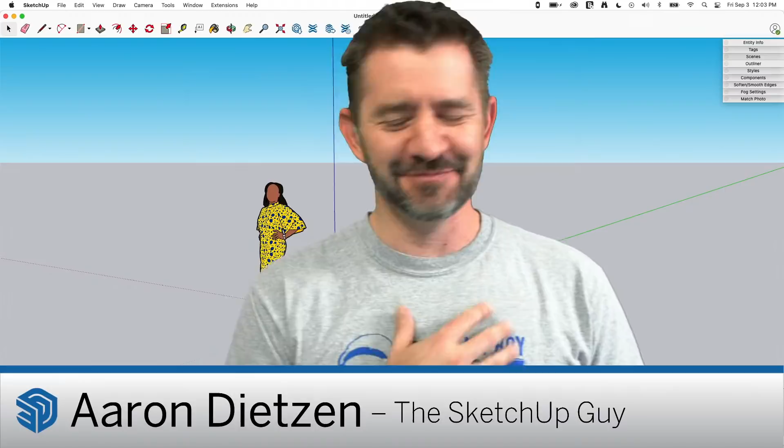Awesome, thank you Matt, well done as always. I was kind of surprised, I thought we were going to hear some trees fall, that's where I thought that was going, but I was fully prepared to hear a tree fall. Wait, you couldn't hear the tree fall? Is that what that was? It sounded like somebody stepping on a frog. Maybe it was a tree that fell in the forest but nobody was there, which answers the age-old question.

A little tree. Hey guys, I am Aaron Dietzen, I am the SketchUp guy, the guy who's going to be doing some modeling today. I have some friends with me, of course. Hanging out with me in our ears doing our intros is our remote sound guy dialing in from Michigan. So let's hear it for Wyoming, Michigan. It's a place. Yay, Wyoming!

And in the booth with me, in our studio, back from sabbatical - you guys missed him and you told us, so we brought him back - Jody, who is playing the role of producer today. I might be going to Wyoming too. So yeah, we're your SketchUp live team, and we're going to do some stuff today.

So this is actually directly from you guys, this was directly requested. You guys wanted to see a cabin get modeled, and we kind of kicked that around. We thought a log cabin specifically, as opposed to a traditionally framed one, that's not much different from like the sheds we've done before. So we thought a log cabin would be something new, something kind of fun, and I don't know, we'll see where it goes. But that's it, we're gonna jump in and start doing this.

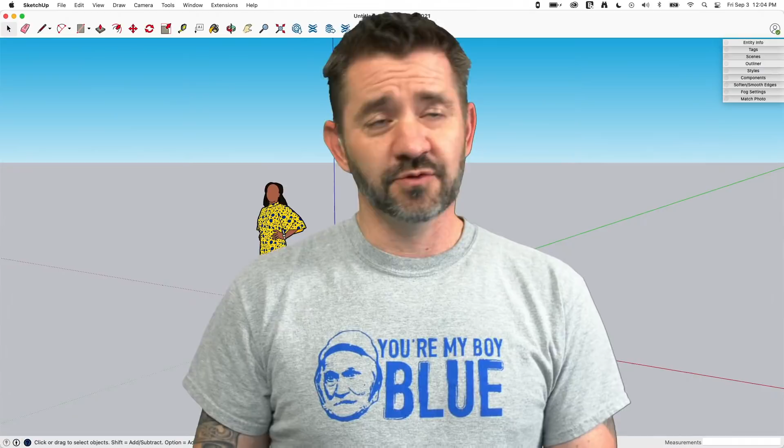Just so you guys know, I know how a log cabin goes together, more or less. I'm not gonna call myself a professional log cabin builder. I also don't want to brag, but I have taken part in a log cabin build once when I was like 12, so I got experience. I did one when I was about 14, which I guess was close to when you were 12. Maybe at the same time, give or take, a year apart or so. So, gonna be flexing those cabin building muscles that I developed in my youth. So let's hop in.

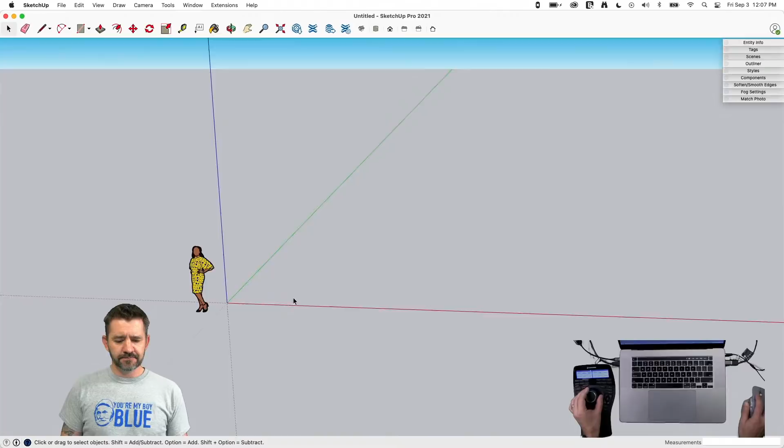I want to build a rectangular structure, so it'll be like, I don't know, 25 feet by 40 feet, something like that. And we'll have two logs, a short side log and a long side log, and then we'll just start by copying those over and over again. So this will be pretty simple to begin with.

I'm going to start, we'll just create one of the logs. So I'm going to create the 40-foot log real quick. I'm going to start with a circle, and I'm just going to stick with the standard 24 side. I don't really think I need to go higher or lower than that. That seems about right.

How big is a log that you build a house with? I'm trying to think - I would say somewhere between 6 and 8 inches. Really, that small? Well, I guess it depends on the log cabin. The one that I built 30 years ago was a pre-built kit, and they were all probably 6 or 8 inches on the side. The cool ones, the bespoke ones, have big foot diameter kind of things.

All right, let's get bespoke with this thing. I'm gonna go 12 inches. Actually, I'm gonna go 6 inches because it's the radius and not the diameter. There we go, so we have a 6-inch log. I'm gonna take this, I want to make it 40 feet, and I want it to extend out a foot on either side, so I'm gonna make this 42 foot. Nice, wow, telephone pole, that's a big piece of wood.

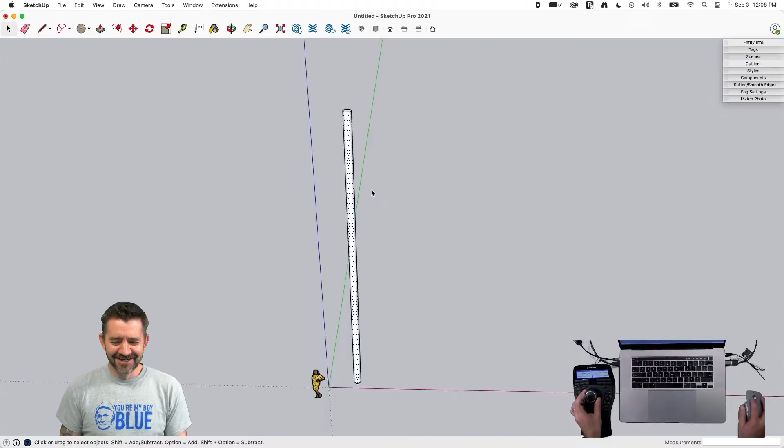All right, I'm gonna make that a component. Big old log, number one, we'll call it a 40-foot log, even though it's 42 foot. Maybe 40 is too big, am I just living the fancy guy life with that? Is that too much? We're gonna lay it on its side.

All I know is that we used multiples to create walls, so it was a bunch of 6, 8, 10, well probably 10, 12-foot ones. I don't think I've ever seen a 40-foot log. I don't think so either. So I'm gonna shorten this up by 10 feet. That looks a little more realistic. All right, I think that'll work, I don't know.

We'll see, we're winging this whole thing, right? So I'm going to take that and go from the center line, make a copy over this way, 25 feet. Boom, gosh, that seems huge too. All right, so we're going to say 20 feet, we'll bring it back, 20 by 30. That's the size of our cabin.

I'm going to take one of these right here, I'm going to rotate it on the flat. I'm going to option rotate 90 degrees. Obviously it's not lined up right now, I'm going to scoot it over.

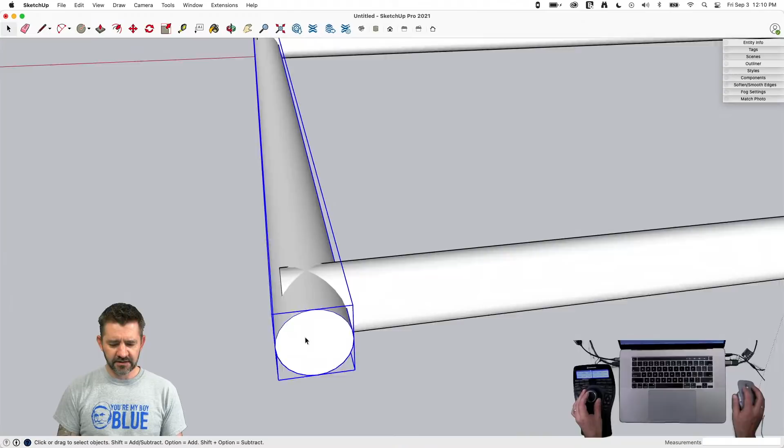So I'm going to take this end right here. I'm going to slide it over to the middle, and then I'm going to slide it over 12 inches. That gives me a 1 foot overlap this way. Same thing here. I'm going to grab it by the edge, pull it in to here, and then move it this way 12 inches. That gives us more than the center. Sorry. I'll put the center right here at the edge and then slide that over 12 inches. So that gives us, this is the overlap we want to maintain throughout this whole thing.

Now, so what did you say the diameter was on these? 1 foot. Oh, okay. Yeah, it occurs to me that also, since this is just fun, if you have a 6-inch log, it's going to take a lot more rows of logs to make your cabin. That's true. Literally twice as many. One would say. All right.

This is not going to work because I have the same component on all three sides. That's not obviously going to work. So I'm going to make this into a new component. I'm going to say make unique. After I make unique, I'm going to pull up entity info and change it from a 40-foot log, which is actually a 30-foot log, down to a 20-foot log. That's going to be confusing. I should probably rename all of these.

Speaking of confusing, having all these monitors, gigantic monitors and tabs and screens, I'm a little overwhelmed right now. Yeah, this is studio life. This is real deal. I don't know how I feel about it.

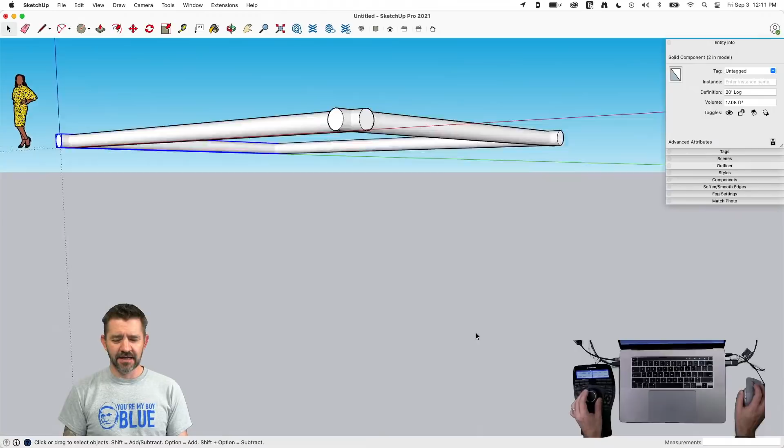I'm going to shorten this one up by 10 feet. And then I'm going to grab it and option copy it this way, 30 feet. All right, so that's the footprint of the house. I know the logs are crossing through each other. I haven't missed that. I do realize that's happening. But that's okay, because right now I just wanted to get the general layout.

This looks good. What I want to do is I want to go in and notch my logs so they sit inside of each other. So one's going to, at the ends we'll have a notch. So when this all goes up, each one will rest firmly upon the one below.

So what that means, these two, my two end logs, are going to go up, move them vertically, constrained to the vertical axis to the center of this log here. And then I could actually, at this point, grab that, option, copy that up, and we could do that like 8 times, which gives us like a 9-foot tall log cabin. So we're almost done at this point. Nice. Done. Good job. We really nailed it today.

Andy still said he can barely hear me, even though I'm all up on this mic. Oh, see that? When you just said all up on this mic, you got up there. Your audio shot up. I got louder? Okay, so yeah. I literally just need to, my lips keep grazing the edge of this thing. That's the one. We'll wipe it down afterwards. Don't worry about it. Did you wipe it down before? You're pretty good friends with Tyson, right? He's the last one who was on there. Wow.

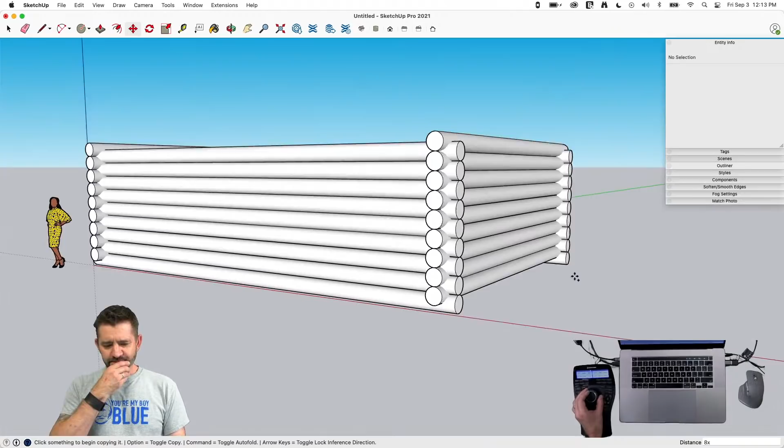Cool. All right. So obviously we're not really almost done. What we need to do is we need to come in and notch some stuff. I do want to keep some of these unnotched because I might want to use them on the top or something like that. So I'm going to option copy these over here and I'm going to hit make unique. So that just gives me this set of, and this is just something I recommend to anybody who's using components. As you go and use components, anytime I change one of these, they're all going to change. That's the nature of components. That's how it's supposed to go.

But you don't always want that. So I find in my working models, when I'm working with components, you guys have seen this on some of my models, I'll have previous copies of components just kind of sitting over on the side, just to hold on to in case I ever need to go back to this shape. This is a pretty simple shape. I could probably... And that's just like building a real log cabin. I usually have an entire floor or entire row of logs sitting off to the side. I just pick them all up and carry them over.

Usually, because Jody's just knocking out log cabins. No big deal. Yeah, I mean, it's a thing.

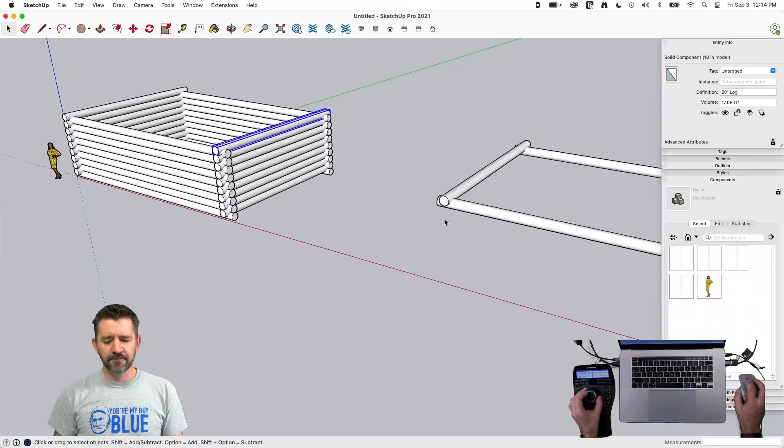Okay, and so as far as a workflow thing, those components would be saved in your components browser or whatever, right? So you don't need to have a copy of them off to the side, but it's more just for your peace of mind, or that's what you're used to doing kind of thing. Absolutely, 100%. Yeah, Matt's right. So right now I have these components, my 30 and my 20-foot log, and then I have 20-foot log number 1 and 30-foot log number 1. These are the copies. So if you look over here, I have these sitting here.

So if I was to delete these, or in fact delete all this, I could bring it all back with my component browser. Or Control Z. Or yeah, I can undo and get it back too. Excellent point. My issue with this is if you look at my thumbnails, they all look like pieces of chalk. So to come in here and find the one I need, I guess I could change my list to list view and I could find out what I need.

But yeah, for me, it's easier to have this. Like you guys saw when I posted about the big Lego build I did, I actually had physical ones sitting off to the side so I could grab them real quick and copy them over rather than having to dive into the browser and find those. Especially when there's only a couple of them like this, it's pretty easy to set it aside. They're there in case I need it.

So Lawrence had a good pro tip: whenever he moves stuff off to the side, he moves it a fixed distance. That way he can move it back. That is an awesome tip, actually. If I know it's going to come back in, I will move it in increments of 10 feet usually. So 10 feet, 100 feet, 150 feet, 500 feet on one axis. That way you can bring it just right in.

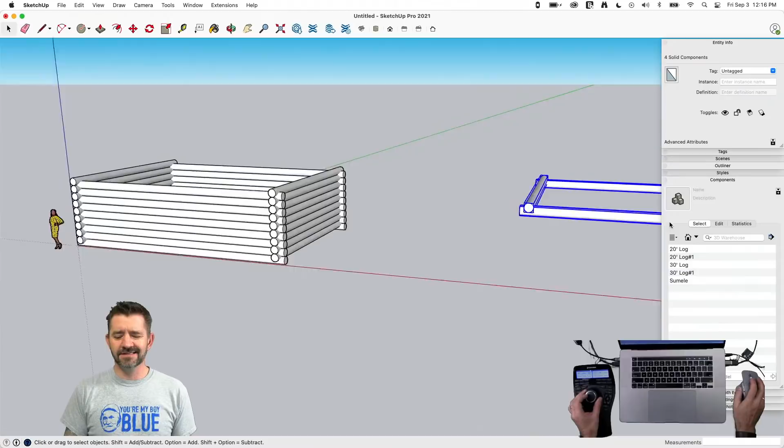The other thing I could have done too is I could have just made a copy of them in place and put them on a tag that I turn off. That would work too. But like I said, I'm very visual with my modeling, so seeing this over here kind of helps me. All right, let's talk about this.

So what I want to do, I'm going to hide the rest of my model. I'm also going to go into View, Component Edit, and hide similar components. So I just want this one thing. If I look at that, I don't like that the axis is all the way over there. It always kills me when my axis ends up off axis. Can I reset it? If I just say reset, it's just going to go back to... No.

Nice. Sounds like somebody just buzzed us. Oh, could you hear that? Yeah. Oh, wow. Yeah, that was just background noise. Keeping it real. Even though you guys are in the studio, I am. That's right. Matt's not living the studio life, unfortunately. And apparently Matt's mic doesn't have to be in his face to pick up sounds. Yeah. I bet if I went out and fired up a weed eater, you'd probably hear it.

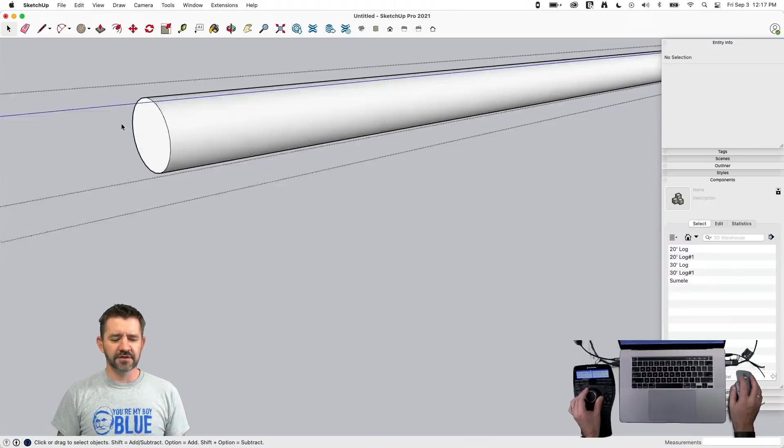Probably so. All right, so what I want to do is notch the bottom of my logs. So each log, if I look at this, I want to see a notch right here and a notch right here that will fit over the round top. Like I said, full on Lincoln log style. Except I only want to do it on the bottom, so I don't need it on the top. I know in real life I'd probably plane out the top so there's a snugger connection and I have less to insulate, but we're going to pretend these are perfectly round, ideal, beautiful logs.

Yeah, the kit I built had smaller logs than this, and the tops and bottoms were flat. On the bottom it had two channels running along the whole length of it, and then it had two reverse grooves running along the top, and they just all slotted together. Grooves works. But when I've seen this style, there's also usually a spline between the two. They'll run the length of it with just a groove cut out.

And they stick a, like a half-inch spline or something that keeps it all from rolling off. Because rolling, that's a problem with round logs. We're going old school. We're going like Jebediah Springfield right here. Okay, all right.

So what I'm going to do, I'm going to come in and grab this geometry and Control C to copy it. I'm going to come in here and I'm going to do an edit, paste in place. As soon as that geometry comes in, I'm going to right click and group it. I'm going to grab this geometry right here, group it, and I'm going to take this group, option, move it over

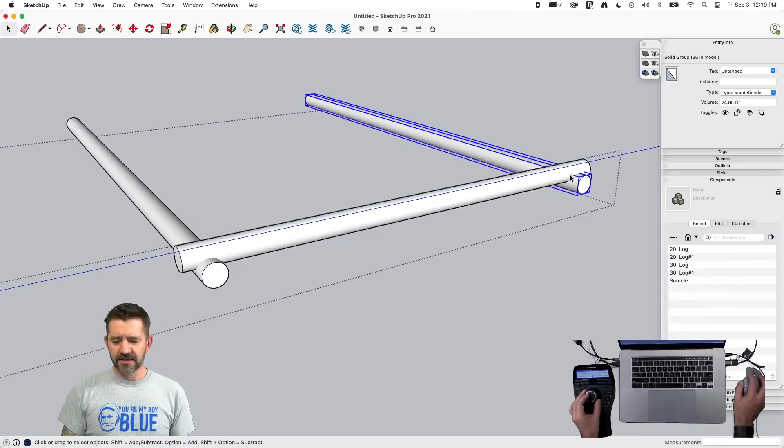20 feet. All right, so now I have these two sacrificial groups that are going to help me cut my channel into this piece. I'm going to use solid tools for this. So I'm going to go tool palettes, open up solid tools, and I'm going to say, okay, select this one and subtract it from this one. And then select this one, subtract it. That was exciting. From this one. I don't know what just happened, but something happened.

A thing happened. All right, so if I look at it from this angle right now, I can see those lines where the small logs run over the top of the bottom logs. This side, not so good, right? Because I still don't have a line right here. I can do the same thing. So I can go grab this guy, grab this geometry, copy it, come into, oops, hold on.

Actually, one thing I do want to do, I can explode this geometry now. You guys have used 3D Warehouse. You've probably seen this where you download a model and it's just containers around raw geometry, just groups inside of components, inside of groups. I try not to do that. I try to keep the minimal number of wrappers around my geometry I need. This log by itself is one thing. I don't think I need 2 or 3 different wrappers around it. So that's why I did go in, make sure I explode it back out. I just need that geometry.

All right. Extra packaging here, keeps it super fresh. That's right. Geometry will never spoil. Oh man, my modeling's good enough. It's super fresh. I don't need help with that. Super fresh. That's what your shirt should say.

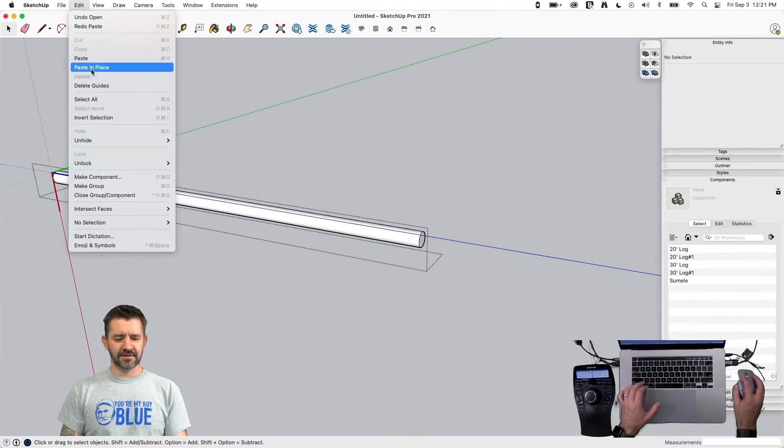I like that. All right, so I'm gonna grab this in, same thing, make a group. Huh. Okay. This over this way 30 feet. I'm not sure why I got that angled container. Let's see what happens when I do this one. Grab this guy right here, make a group, as expected. All right. Huh. That's neat. All right, so I'm gonna use this, subtract from here, use this, subtract from here. All right, so now I got my grooved logs.

Nice. Groovy. Okay, so here's a pair of questions. When was the last time you worked with Lincoln Logs? And since we have an audience that is not all just here in the US, I wonder if Lincoln Logs exist as Lincoln Logs or another name elsewhere. That's a good question. I think I built something on Lincoln Logs in the last year. I don't know where I came across it. Must have found my kid's old set or something.

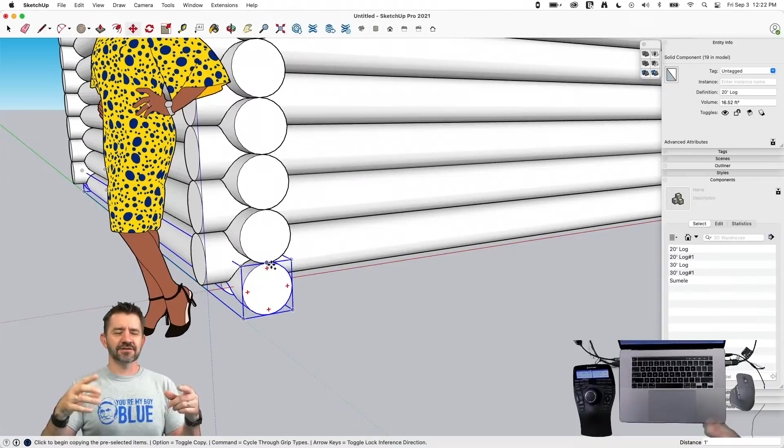I feel like that's a thing that our family has going on at Christmas. For some reason, there's a set of Lincoln Logs we have with our Christmas decorations, and they just tend to come up around Christmas time each time in our house. Did you ever get them in that big metal tin? Yeah, that's how ours currently exist. Yeah, and that tin's getting emptier and emptier every time I see it too. I think it's like an outhouse building kit at this point. There's like 2 super long ones and then a bunch of little things. So as Lawrence pointed out earlier, referencing logs is just bathroom humor waiting to happen.

Oh, nailed it. I'm gonna grab this guy right here and make it unique. I'm gonna set this one on the ground. So I'm gonna come in here and I am going to put geometry on it that's gonna cut it in half. So I could try to do something with solid tools or something like that. But as I look at it, again, I like to do the quickest, easiest commands to get the job done. Doing that and cutting it, and then just selecting and deleting that bottom half seemed like the quickest way to clean that up.

So I know I got a little bit of scrap here to go back and clean up, but it's little log spider legs or something.

So I know spiders have 8 legs. But how many do spider logs have? Yeah. That's a good question. Speaking of Loggy long legs, speaking of spiders, did you watch the new Spider-Man trailer yet? When it came out, a week ago? Yeah. Sorry, didn't mean to sound snotty. When you've been gone for almost 3 weeks, then everything happened. That's just true. It's all I've got to catch up on, 3 weeks' worth. Yes, I did watch that. Yes, and it was good.

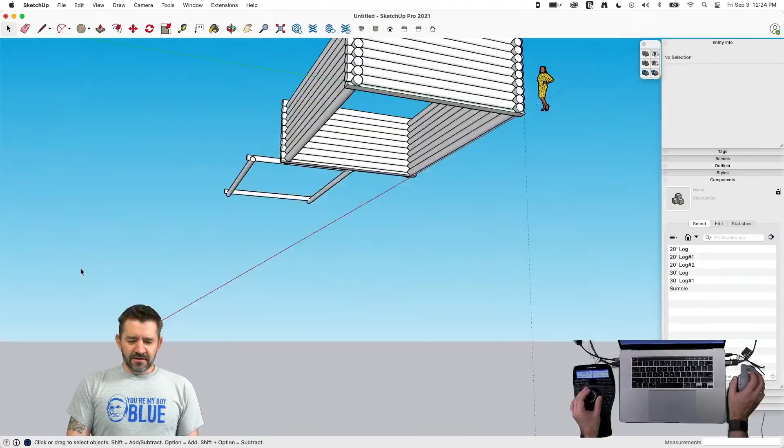Okay. Hey, you know what I should probably do at this point? Save. Oh, that lazy save. The lazy saver? For some reason, that now always makes me think of, and it's unfair because it's really a Matt sound, but it makes me think of Nick. A lightning save. His attempt to reproduce it was up there. Huh. Oh, I guess I might have some.

Hold up 1 second. Where's it at? General. Oh, there we go. I do not need to autosave, and I do not. Oh, that's okay. I don't care if you do that. Just don't mess with it. Okay. Had some autosave stuff turned on that I personally don't care for.

You don't like to save. I don't. I mean, I think I've pretty well proven that saving's just not my deal. It's not in your wheelhouse. It's not a thing I do. Okay. Cool.

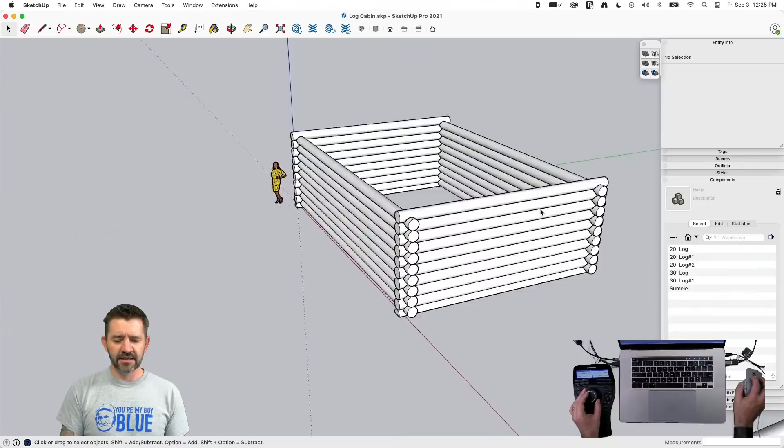It's looking good. It's definitely got a cabin-y feel. So there's a couple things we're going to do at this point. We're going to come in and put some doors and windows in. I'm picturing a door right here in the middle, maybe a window, and then maybe we'll do a window in the middle of each side here. Keep this back wall solid like that. Something like that'll happen. I want to put a roof on it, of course.

My roof, as I take it up, I want my logs to continue up the peak. And then I'll have basically a ridge beam. It'll be a log. And then halfway down on either side, we'll put another log perpendicular. So on the end here, as it goes up, we'll have a log at the peak, a log coming down here like that, running horizontally across, if that all makes sense. Well, I want to do it even if it doesn't make sense. That's what I'm going to do.

Maybe before you get started, you can talk about that thing there in your left hand. A question came up about this? What, this whole thing? Yep. So this right here is my 3D mouse. It is a SpaceMouse Enterprise from the company 3Dconnexion. A 3D mouse allows you to move your model in 3D space without using this piece right here. So I can hold this in my hand like this and still spin around right here.

This is good for two reasons. One, as a designer, it's the thing that can allow you to go to that next level. Because as I'm moving this hand over here, moving in 3D space, this hand is free to move the mouse and edit the UI, grab the next command, whatever I want. I can do that here while this mouse is going and grabbing whatever I need.

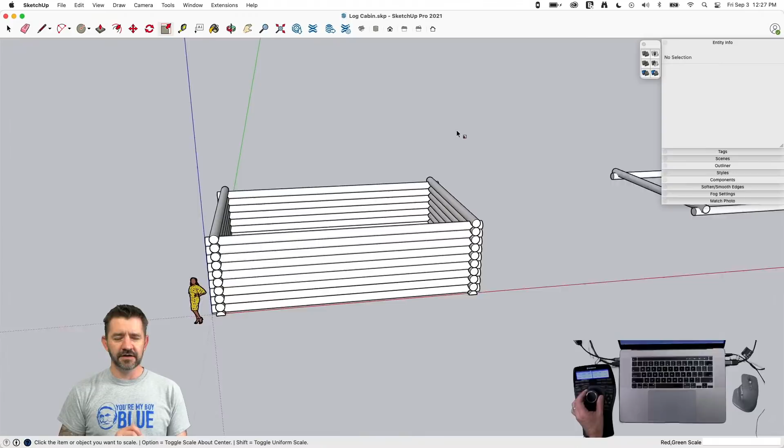The other thing it does is it makes for very nice presentations, because I can move in much smoother increments with a 3D mouse than I can using the roll and then drag and orbit here. SketchUp users are used to this, right? We all know how this works. We spin, spin, spin, zoom, zoom, zoom out, spin, spin. It's actually very intuitive and easy to learn, and I recommend new people figure out how to use that because it makes moving in 3D very simple.

The downside to it is if your brain's not prepared for that, it can be a little disorienting. Same with this. Some people, believe it or not, don't enjoy watching this jerky movement. So if you do a lot of presentations, you show models to customers, something like that, something that can take it to the next level is moving around with a 3D mouse like this.

Nice, smooth movements. Buttery smooth seems to be the phrase that pays. It's what comes up every time.

So that's how it is, it's not a requirement to run SketchUp by any means. You don't have to have it. But I usually recommend it to people who are either doing a lot of presentations or they're designers looking how to go from where they're at to the next step. It's also worth saying, tech geeks that just like to have new, cool, whiz-bang things - it is an awesome toy.

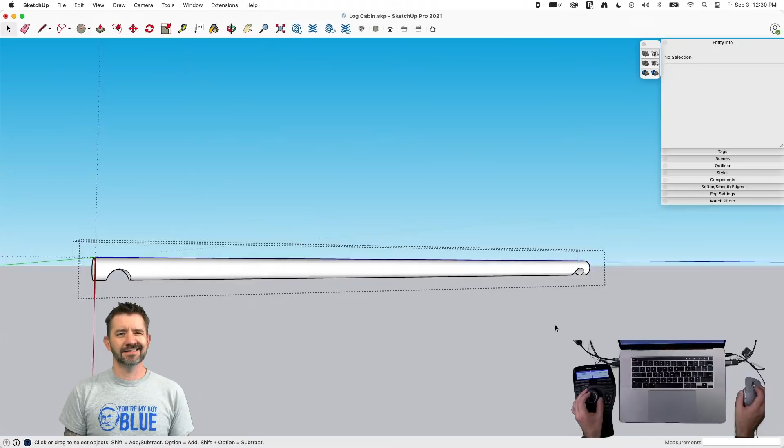Bill's also wondering if it's easier to stand or sit while you're modeling. I've done a lot of both. Standing's kind of nice - I think I tend to be a fairly animated presenter. If I'm talking about something or brainstorming, I like to walk around the room and that kind of thing, so standing up works a little bit better for me. But there's also times where I've done longer design sessions or modeling large models, a hotel, something like that, where it gets tiring and sitting down is kind of nice. So I'll go either way.

He said thanks, so that must have been what you wanted. Although Irfan did wonder how you isolated that object from the others.

Each of these are components right now, so if I double click into one of these, everything else goes away because I have some things turned on. If I go up here to View and then Component Edit, you can see Hide Rest of Model is turned on and then Hide Similar Components. If I turn them off one at a time - Hide Similar Components says hide everything else that is this same component. And the other option, View, Component, Hide Rest of Model, is going to show everything, hide everything else. Generally speaking, I do have a shortcut key for Hide Rest of Model, so I'll toggle that on and off with a shortcut key on my mouse. But I don't usually hide components unless I have something like this, where it's the same thing over and over again.

Yeah, but that's a good tool to know how to use because it makes it a lot easier to go in and model those entities for sure. Nice, thanks.

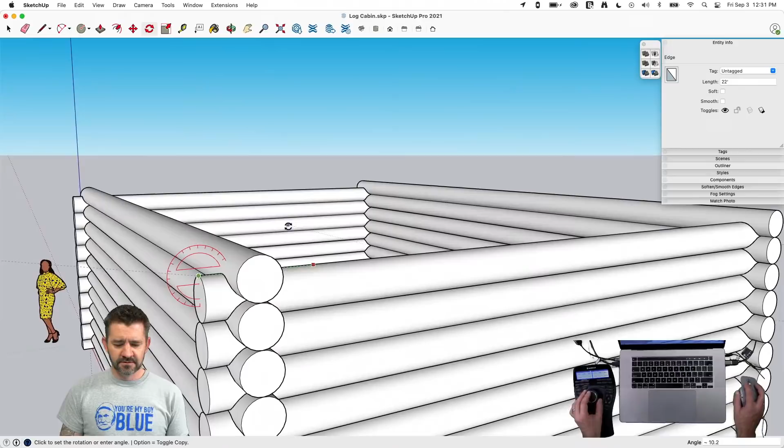All right, I'm going to draw some geometry here. This is something where I could probably use guides, but I'm not going to - because they didn't have guides in old-timey days, that's when they made right, log cabins. And I don't have a specific...

I wonder, if I was to... I feel like since we already renamed layers to tags, I think we should rename guides to Sherpas or something, a little more adventure-y.

I'm just going to rotate this roof so that it... whoops, I forgot to hit Option. I'm just rotating it here so that it comes up and touches the side of the log right there. Didn't hit the Option again. Wow, third try's the charm, folks. Let's try it again - so I'm here, get constrained, hit my modifier key to copy, not move. There we go. All right, so that is the roof I want to put on here.

Not 100% sure I'm going to do this, but I'm going to grab this piece, Option, put it up here. Let's see, we'll do it five times, seven times to cover that geometry.

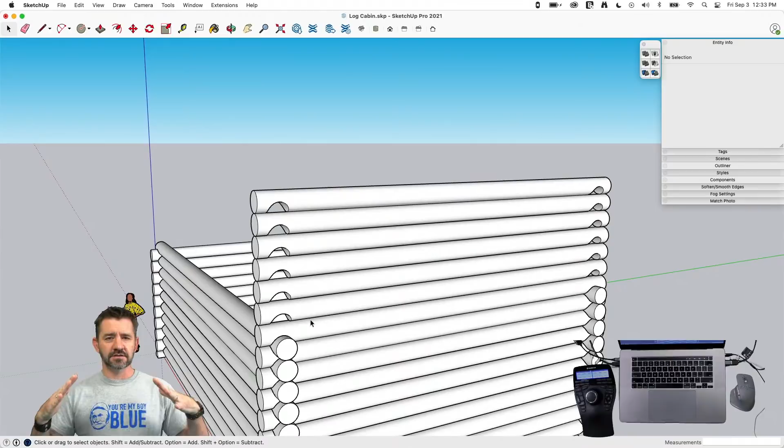Now, here's the thing that's going to happen. I'm going to create some geometry to start chopping chunks out of these logs because I want the logs to follow where the roof sheathing will go. So I want to come up to the flat like that. The problem is that each of these will have to be a separate component.

The only reason - and this isn't a problem, this is something I have to address right now - if I grab all of these right now and say make unique, what it does is it takes all 7 copies and makes all of them the same new component. So you see they are all log number 3.

So in order to do this, I have to say grab this one, make unique, grab this one, make unique, and work my way up there. I believe there's an extension called Make All Unique - does that sound right, you guys? Do you remember, is that familiar? I never used it. That will let you grab them all, and then everything you grab becomes its own new thing. But I don't remember what that is, and I don't know that I have it installed.

So having done that now, I can look at this, and I can see this is 20-foot log 3, 4, 5, 6, 7, 8, and 9. Cool. So I'm going to grab these.

So do I need to keep them as components is probably a question that I could ask right now. I don't know. Nice, good definitive answer. I love that, I definitely don't know. Okay, better, that was definitive. The reason I say I don't know is because it really depends what you're doing with this model, is what it all comes down to.

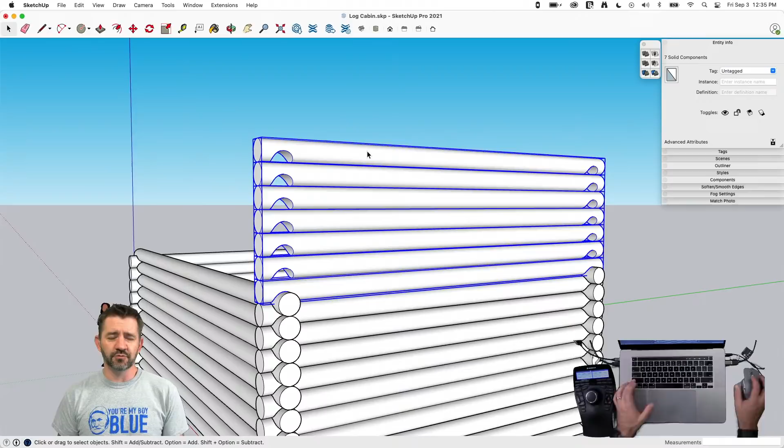If I'm using components to make a materials list, then they'll have to end up as components. If I'm just modeling this as one piece, I could probably grab all these and put them into a single geometry and have a single solid out of all of them. It really depends on what you're using it for.

I'm going to try to keep my pieces separate. Not that I'm going to break this apart and go build a log cabin out of it, but it may be a reason to keep it as components, is what Keggy's mentioning right now. Whatever I do here is also going to have to come over to this side, so making components probably isn't a bad idea, since I may go edit it afterwards, and then both sides will get edited the same. So that could be a reason to keep it that way.

All right, I'm going to take these right now and slide them this way 2 feet, because I need to get back to this geometry right here. I'm going to triple click and make this a group, then go into that group. What I need to do now is make a cutter.

So I'm just going to draw some vertical lines, like that. Pretty much exactly how we did it years ago when I built my log cabin. Yep, just a big chunk of throwaway geometry - that's what we're looking at.

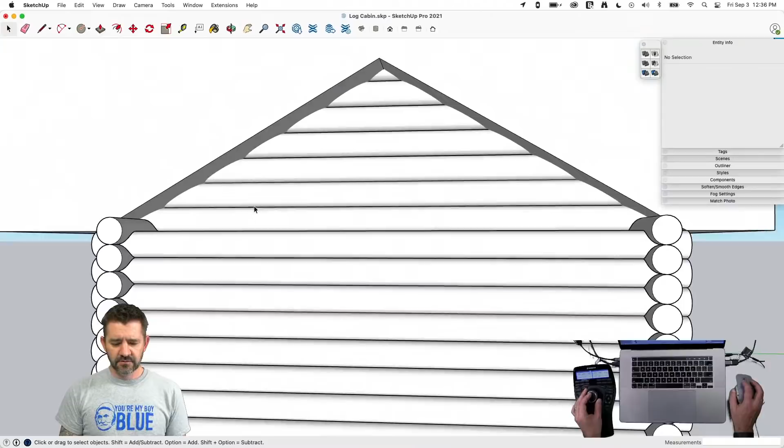All right, so that is just a big solid cutter. I don't like when geometry laps out up to the edge of my cutter, so I'll make it bigger. All right, so there we go - that is the kind of geometry I want to cut out of this.

So what I can do now is select this piece. I'm going to throw out this one because I'll actually have my ridge beam there anyhow, so I'm just going to toss that one out. Select this one, and rather than saying subtract - this is a big difference - if I say subtract and subtract this from this one... wait, what? Subtract.

What did I hit? Oh, I didn't hit the right one. They're so little and so similar, and I can't see good anymore. So I say subtract that from this - I will get this log, but look, my cutter's gone.

So what I'm going to do instead is select it and use the one below it. No, it's not below it, it's this one over here. Wait for the tooltip if you can't see those buttons.

And I'm going to use trim to trim this, then this, then this, then this, then this, and then finally that. So this one's having a problem - there's an issue, I think it's because my geometry laps through, I think it runs up against the edge. So what I might do here, I'm going to option push-pull this all the way through like that.

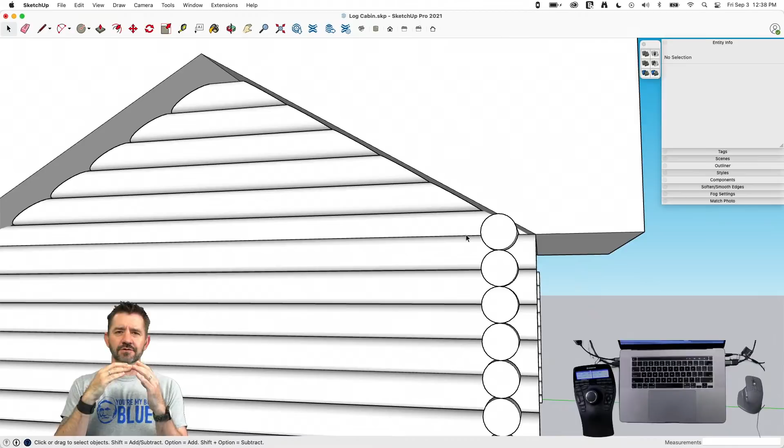When you do solid tools and have geometry that comes to a point, solid tools and points aren't great because they're confusing spots. Just like if I tried to make these two into a single component, solid would have an issue because it has geometry that joins at a single line. By the general rule of creating a manifold piece, a solid piece, one line always connects to only two surfaces. If you think about a cube, all 12 lines, each one only connects one surface on each side.

When you have geometry like this, where the pieces connect and come together with a line here, that center line is then connected to 4 faces. So it violates the rules of what a solid is.

That's exactly what I was creating with that intersect. Right here it's hard to see that line, but where it's connecting I was having geometry on this side and geometry on this side, so it wasn't making a solid, which is why I threw it out. By extending it long like that, I should be able to select here and then trim this, and then I should have that. So that's good, though obviously not perfect.

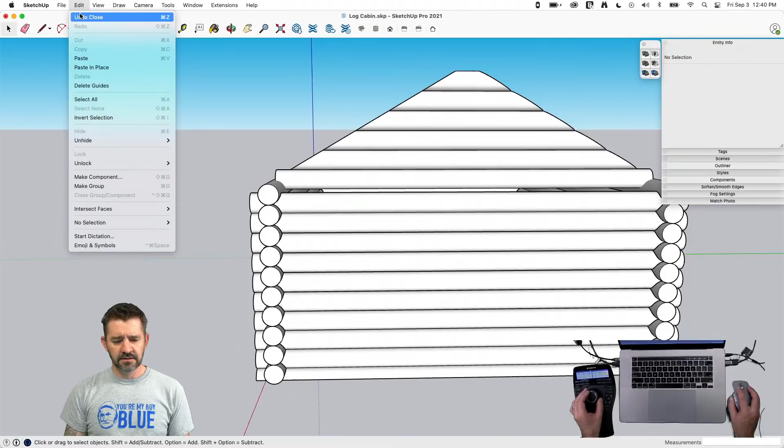So what I'm going to do is temporarily hide this. I come into this, turn everything back on. I'm going to push this end to the middle here, and then double click here. That lets me come back out, edit, unhide, last. And now I can do one last subtraction here because I can grab this guy and trim this. All right, there we go.

All right, so now I will grab all of these and move that back 24 inches. And this does sit on here, so I'll probably want to honor that notch.

So I'll do the same thing I did before. Grab this geometry, Command C, come in here, hide everything else, edit, paste in place, make a group, move it over 20 feet, make a group, and then same thing. So now we can just subtract that from here and subtract that from here.

Nice, it's a lot easier to make these not in real life. They balance a lot easier on top of each other, you know? Perfect circles, just like in nature, how we have those all the time. Yeah, absolutely. Who wouldn't love to have, what is that, probably 120 different logs, all perfectly straight, same diameter.

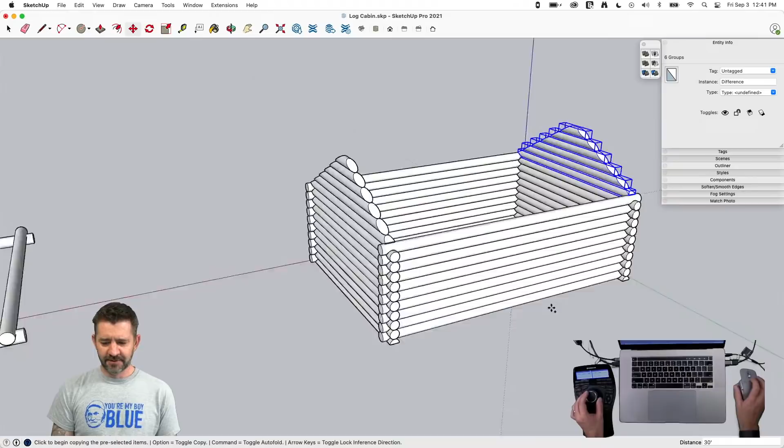I'm going to copy that over 30 feet, and we're going to take a look at putting our ridge beam in.

So for this, I am going to go to the ridge beam we had over here. Let's see, if I grab it by this point right here, and I'm not going to get in the right spot, but I just want to get it aligned to the proper height, I think. And then we'll slide this over this way to any midpoint. All right, I think that works.

I deleted my roof solid, but now that I did that, I'm like, I really could actually kind of use that. So I'm going to make a roof plane right here.

I'm going to attempt to use rotated rectangle. Wow, you gotta be careful. Not that that's a big deal, I just never use it, so every time I come in here to try it, I'm like... So I'm going to grab this point here. Click, click, click. First try! Nice, look at that.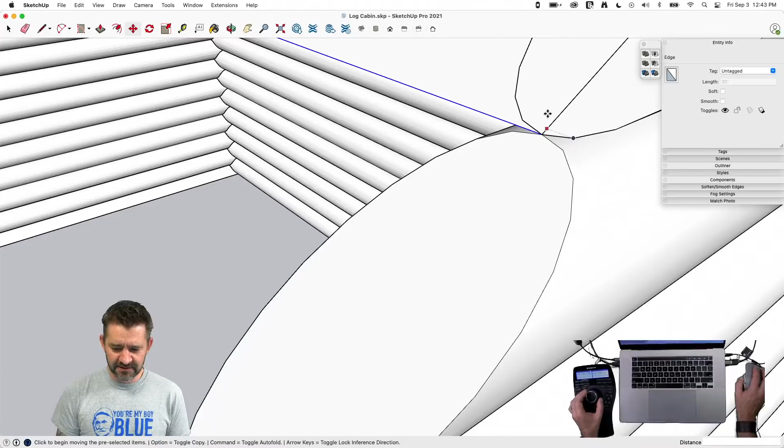And then I'm going to grab this end and move it from this intersection down to the middle of the edge of this log here. Okay, shaping up nicely. Got a little protection from the elements there.

That's nice, it's nice. All right, so I'm going to extend this piece long. What I'm going to do is grab it and move it from this intersection to this intersection, which keeps it in plane by using the snaps on that log.

Cool. Now I need one on the other side, and I'm trying to think of how to best... oh, I know what I can do. I'm going to grab it and make it a group. I'm just making a group so the geometry isn't joining with it. Actually, everything's components, that wouldn't happen. And then I'm going to show my hidden geometry.

I'm going to do a rotate along the center of this log. I'll hit rotate, slide up the middle of this log until I hit that midpoint. There it is. I'll go Option, swing that around 180 degrees, and we have those two making our roof geometry.

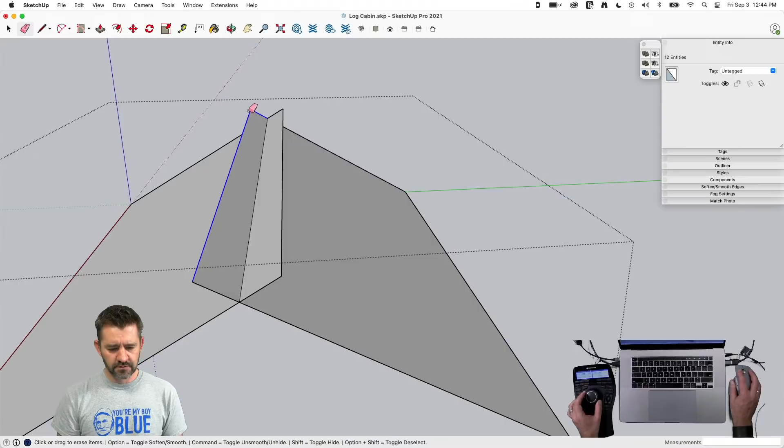So I'm going to make a group out of those two groups, come in here, explode both of them, put a line down the middle. There we go. So that's a roof, folks. Argue with that if you can.

So if the roof's going to sit on top of these cut logs, that's the geometry I need to match. So that's the bottom of the roofing, basically, that's my ceiling. So when I come in here, that's what I want to see.

So this log I have currently needs to get dropped, right? Because it's coming up through the ceiling right now. So I'll go ahead and take it and push it down. I'm just going to start dropping it down to see what happens here.

So you're going to add all of the roof support beneath that height? Yeah, so my actual roofing members would then run up on top of this log.

Do you guys believe that? We'll see, we'll see, sure. It's your cabin, man. That's true. I know what I'm talking about. I know, kind of.

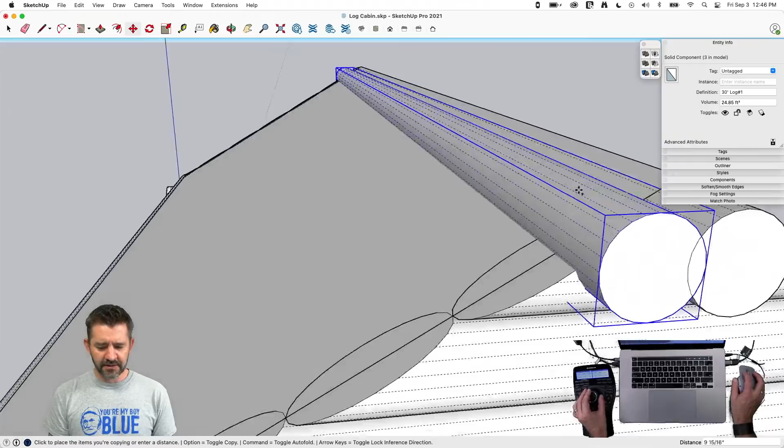All right, I'm going to grab it. This is going to be a little arbitrary, but I'm going to grab it by this point right here. So you see, I did lower it down so that this line and this line, these edges actually hit that roof surface, that's why they're shining through. I'm going to grab it by this point, Option copy it, go down 3 logs, 1, 2, 3, and place this one right here.

All right, I'm going to do that again right here. Option, 1, 2, 3 down.

All right, so the only issue I'm having with that particular placement is that I can't very well notch this like that. We can do anything we want, but I'm going to grab both of these and move it up to the middle of this log right here.

And then I'm going to shift it in again by that same point. It's going to come in to there. That works. So now that puts that in the middle here, so I could do the same notching I did before, without the same issue with that little chunk right there.

So I don't know if that makes a difference actually. Yeah, I don't know how this happens in the real world. I don't know, it's weird. Put a bunch of mud in there. That's right, just fill it all in.

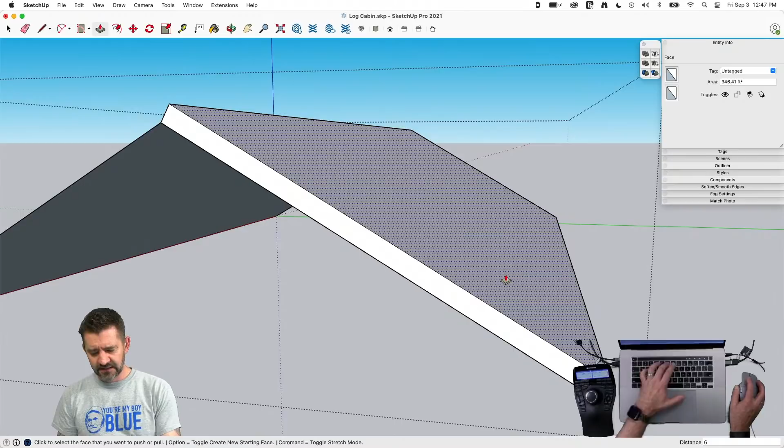There you go. Just for right now, I'm going to take this and make this like 6 inches thick. Double click here.

And then to close up the ridge here, I'm going to grab a line here, continue on up like that. Grab a line here, continue that up. Do a quick push pull down the end.

Just to have something that's more than a plane sitting on top. Here, and we'll actually come over here, we'll pull this down like 18 inches also.

Oh, we probably need to pull these ends out too. Okay. Good. Grab that.

Sorry Matt, do you need class to stop so you can answer your phone? Hello. Go for Abe Matt, Lincoln. Honest Abe.

All right, I want to cut this out. I want to cut a pocket here. So I'm going to grab this, again same thing I did before. Command C to copy that geometry.

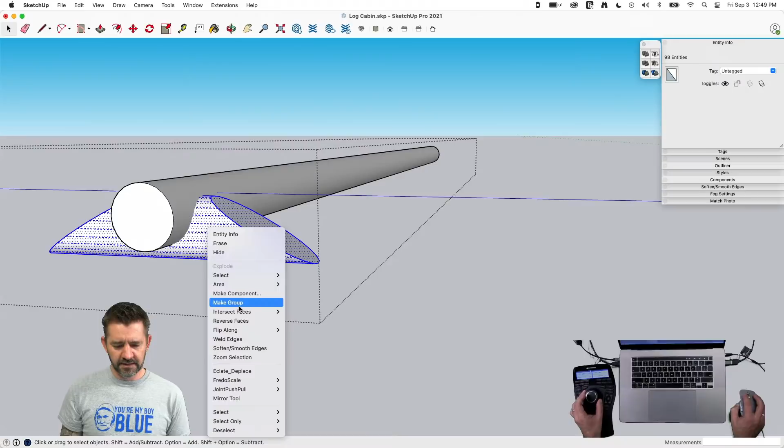Come in here, edit, paste in place, and then make group, make group, and then I will just subtract that out of this.

I'm just going to do the same thing here also. I want to see something, I want to see how far apart these two are. A weird dimension apart. Okay, so I'm not going to do that.

So as I'm watching you do this, in this, what completely looks like a made up fashion. So about a year and a half ago, I came across this YouTube channel called My Self-Reliance. The guy literally bought a big old chunk of land in Canada, sort of like Alaska, and built multiple log cabins from scratch. So even though I haven't built one recently, I have watched somebody do this in the last 2 years.

Are you hinting that I'm not doing this perfectly right now? I think you're doing it perfectly for you. Ah, thanks, I think.

This is exactly how Lincoln intended, how the framers intended. That's right. That's what I heard.

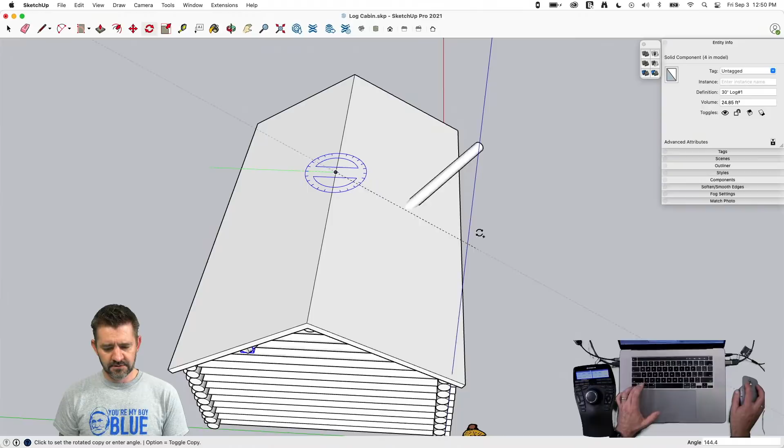All right, that's actually kind of where I want that to go. So I'm gonna take that. I'm gonna go to the top here. Obviously, I feel like I can point this out, but maybe I'm not making a model that would be built necessarily so much as something that's gonna look good.

And yeah, it still was cozy. When we were on the inside for a little bit, I was like, "Ooh, we got a little fire going in here." Yeah. Well, it's all wood, a little potbelly stove, you could burn the whole thing down pretty easily. Well, that's a glass is half full kind of view.

Yeah. I think my issue with this design technique you've got here is that you've got 30-foot logs that you've somehow got to get 12 feet in the air without a crane. Oh, they do it on those Alaskan survival shows all the time. Just need a little elbow grease. So. Not a solid.

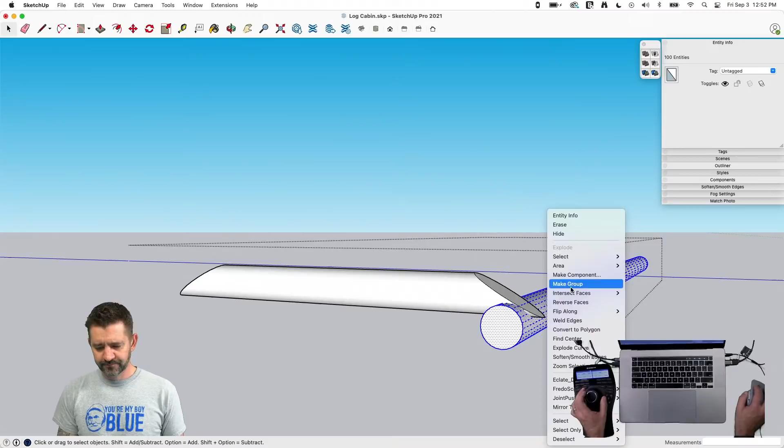Yeah. Huh. Got a stray edge. Save. Save. Okay. There we go. Lazy save. All right, so that works there. And then I'll have to do the same thing. So I'll come in here, edit, paste in place. Ooh, I don't know if that's going to work, but let's find out. Ooh, it did.

Yeah, I'm assuming we'll just, as Matt says, fill that with mud. Get the mud out. I love how mud even sounds. When he has to make sound effects, he's all over it. So don't even worry. Matt's got this.

Nice. Got that. Well, that's not gonna work. Your log's hollow. Oh, neat. That's how I get it up there so high. Yeah, it's gotta be lightweight. It's like cardboard. Fill it in later. I feel like it'd be really flimsy, like a rolled up piece of paper. Yep. It's those big concrete tubes. It's good stuff.

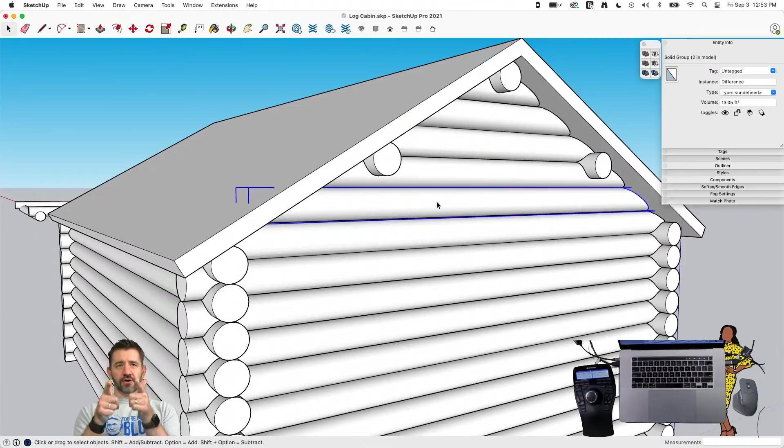Okay, so again, what? Why is this not? This is a group? Oh, because I just did. So, because I'm using native solid tools, every time I intersect something, it becomes a group rather than a component. That doesn't make sense. These are all groups. Oh, because I did intersect on all of them and I didn't save them as new components again. Okay. Yeah, you didn't.

So I'm gonna wipe that wall out. Oh, just got my head stuck in a log. All right, but now I can go. Make these components real quick. And one more.

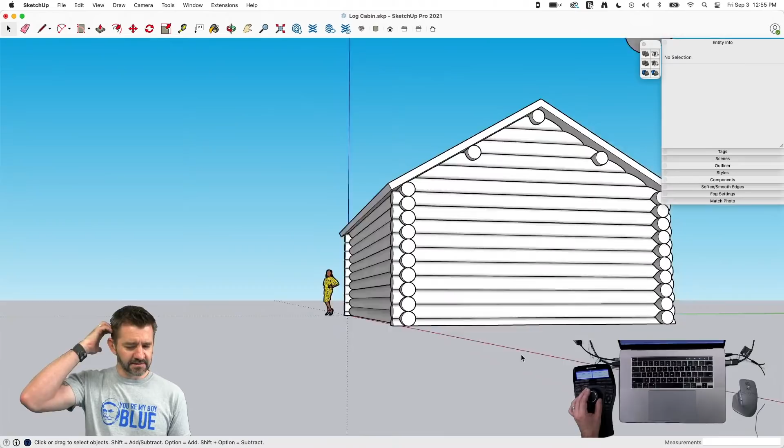You know what you could do is you could make hollow logs like that. And then once it's built, you just go back and you insert wood pulp. And so it looks like a log, super light to build. And then afterwards, you make it more stable. Yeah, there you go. I like this. These are the kind of ideas that come out of this show that really set it apart. I'm gonna have to see about patenting that.

All right. I like where we're at so far. I think this is kind of cool. This is kind of fun. Looks like a log cabin. Can't argue with that. Yeah. And the ability to just keep it private is just like over the top. Ain't nobody gonna mess with you in that house. Yeah, especially since there's no doors.

Yeah. All right. So now we've come to the part where stuff's going to start breaking. We're going to break things now. This is awesome. So what may want to happen at this point is this may be a single iteration. This might get grouped, set off to the side. There's really no way about it.

As soon as I start cutting holes for doors and windows, I'm going to lose my componentiness. So this component can't be the same as this component if this component has a hole for a door and 2 holes for windows in it. So I'm definitely going to break some stuff. Not necessarily a bad thing, but it is something to note.

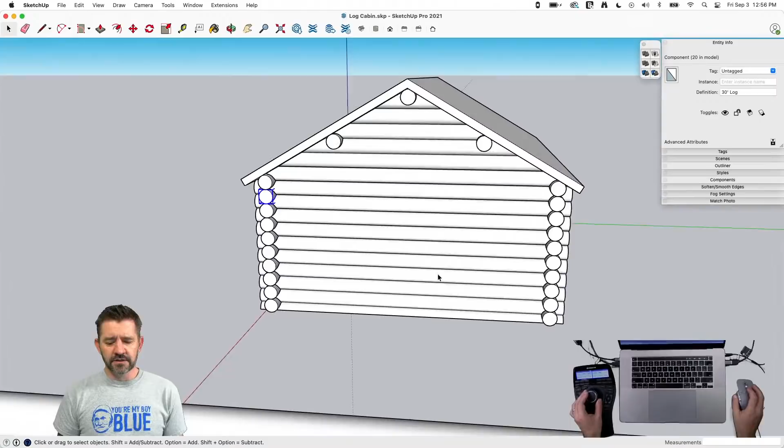It does mean paying attention to your components and making unique as you go. That's how I would go about it. So we're gonna start with the windows on these end walls. I'm gonna put a window right here in the middle. Maybe I'll put it up high. No, we'll just put it down here, normal height.

I'm just gonna sketch on the outside here. If I come up, where's the middle of this log? Is it 8 feet? Maybe we'll go a little bit high on this window. Yeah, so I'll come up 8 feet and make it like 4 feet wide. So I'm gonna go 2 feet from the middle. And then let's do a 4 foot by 4 foot window.

There we go. So I drew half that, and then I'll just option swing that around 180 degrees. So that's the profile of the window I want here. I'm just gonna make a big old cutter, just a huge chunk of butter, barreling right through. The huge butter cutter. Big butter cutter. I like it. So I'm gonna go ahead and group that.

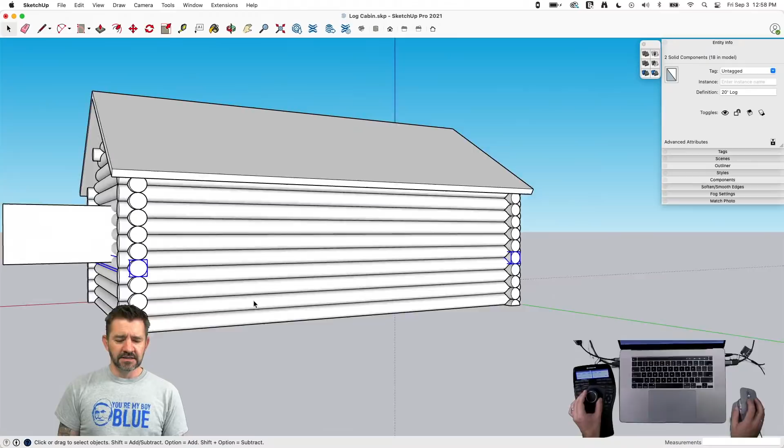All right, now here's the thing that's gonna happen. I'm gonna come in and start chopping chunks of these components out. So what I'm gonna wanna do, and this is just to try to optimize this process as I go, since they're gonna be the same on both sides, that cutter is symmetrical, goes right through the whole building. If I select this one right here, which is the bottom of the window, and this one over here, which is also the bottom of the window, and I right click and I make them components.

I'm sorry, cancel, make unique. Then anything I do to this component is going to get done to this component. And now everybody's going, whoa, hold on. You just told us that when you use solid tools, it breaks the component and makes it a group. That's true. But let's talk about how to get around that.

So I see 2 ways I could go right now. One is to just frame out this end wall, copy all of it, slide it down, and replace this other end wall. That would not be a bad way to do it. That's probably the quickest way to do it. But let me show you this just because I want to. So I'm going to grab this butter cutter. I'm going to copy it. Then I'm going to go into my new log that I just made. Triple click and make group.

Lawrence was asking, he thought each end of the cabin was actually a component, so you only have to cut the hole on one end. You know what? That's an idea too. I could do that also. Seems like it'd be slightly less work. Oh yeah, I wandered down into teaching at this point and not optimization. Oh, I forgot that sometimes you try to do that. But you got a good point.

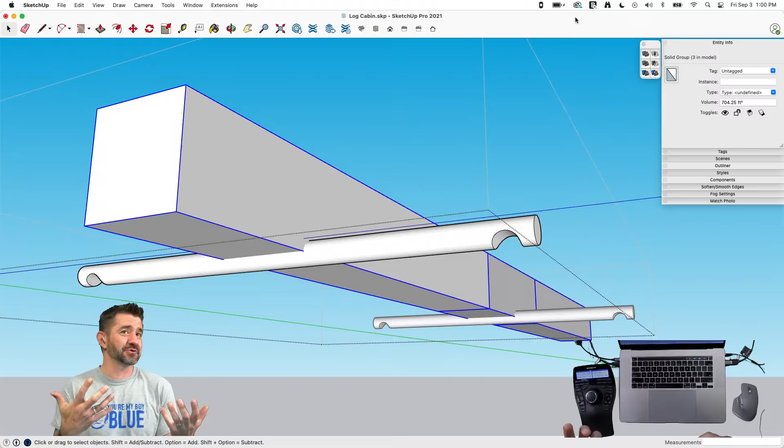Yes, I could make the end a component and then they could just be groups inside, which actually makes a lot more sense at this point, because trying to maintain these as components once I start chopping them up doesn't make much sense. And in reality, if I cut holes into a cabin, I'm not really concerned if this log matches that log. And as far as I know, the material list for a log cabin is a number of logs. Yeah. I'm not going to prefab this log in this way, but I want to show that anyhow. 48 logs, 1 butter cutter. That's all I need. So I'm going to take this and subtract it from this geometry.

All right, so what I did was I did that with groups inside the component. So both components got cut and I can explode at this point and come out here and they're still components. This log and this log over here are still components because my actual intersection and cutting happened inside. So if I take that a step further, all 1, 2, 3, 4, 5, 6 of these guys need to get cut the same way also. So I can grab them, make unique, it's gonna make them all unique.

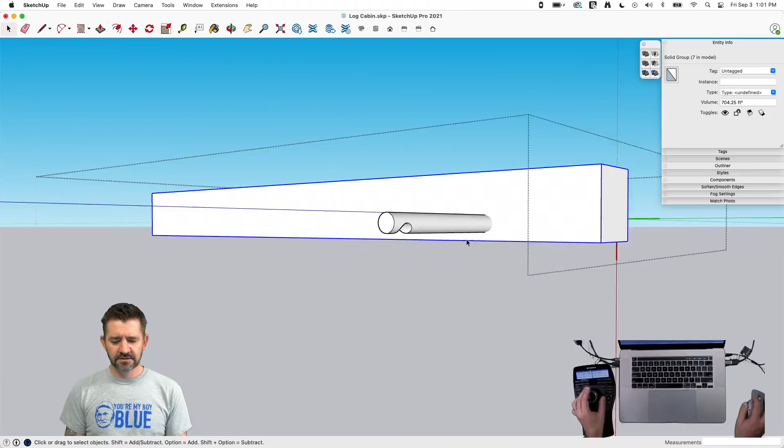Then I can open up one. I'm gonna go ahead and hide similar components. Grab this, make it a group, edit, paste in place, put my butter cutter where it is. There we go. And then if I subtract from this, it gets cut in half. If I come out here, they're all cut because that same component was cut multiple times.

So this is an option. I'm not saying this is the only way. Lawrence is right. You could definitely have made these just a component full of groups and then done it once on either end. That works also. I'm going to come in. I'm going to do these last two real quick because I'm on a roll at this point.

Make unique. I'm going to this one. Make group. Edit, paste in place. Bring me my butter cutter in. Subtract from this. Explode. Come on out. There we go. We got 2 windows. Look at that. So much symmetry. Symmetrically. It's very symmetrically made.

I'm going to go ahead and sketch up a window component to actually put in here real quick. And I'm thinking that I'll probably use the same 4x4 window on the front over here also. And let's see, how do I want to do this? I know, I'll take a rectangle and we'll start that rectangle in the center of this middle log. Give me center, buddy. There, come down from there. I'm gonna hit my modifier key to draw from the middle. I'm gonna come up here like this.

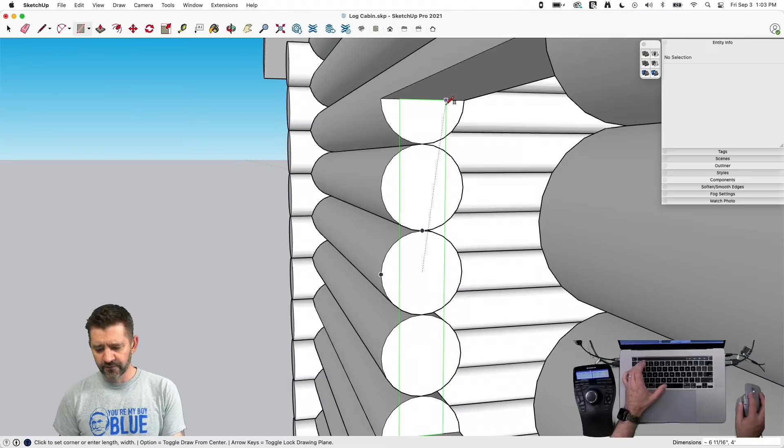And, trying to see how big this is. If I go all the way out there like that. Okay, so I'm gonna say, oh, it's 4 foot. Okay, so I'm gonna say like 8 inches by 4 foot. Give me that rectangle. I'll take that and give it a 2-inch.

We're milling our own lumber, so we're going with whatever dimensions we want. You work with what you got in this forest of 12-inch diameter trees. That's right. Perfect 12-inch diameter trees, no less.

All right, so I'm gonna rotate that and actually, this is the one I want here. I'll run that one straight up. There we go. And then I'll take one, flip it 90 degrees, and then I'll have to... What happened there?

What? Yeah. Yeah. Yeah. You should just map all the sounds to each of the letter keys on your keyboard. Yeah. You just hit the Y key. All right, cool.

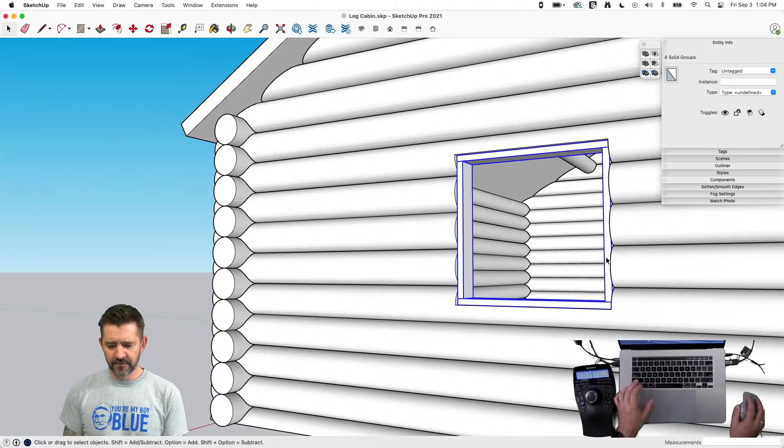All right, so for right now, that's what I'm shooting for. I'm gonna grab these four. Whoops, not that one, not you, buddy. You settle down, big guy. All right, I grab those. Make component. I'm gonna call it a window. And I can go in and put a pane in there, mullions or whatever. But that's enough for right now because I can just option copy that.

Whoa, whoa, whoa. You should do this like full on, like your windows. You can't get glass panes. You've got to make the ends of all your windows out of the ends of bottles and stuff like that. Oh, I thought you were gonna say you're gonna melt down some sand. There you go. Or just get lightning to strike. How ridiculous can we get? Sorry, I didn't mean to say ridiculous like it's a silly thing to make everything yourself. You can do that. Whatever. It's cool. Feel judged right now. Yep, very.

All right, I want to take this up to the center of a log. So we'll go 6'6" or 7'6". 7'6". I'll make like a 3-foot door. So come over. 1'6". That looks a little too tall and skinny, so I am going to drop it down. But all right, I'm going to do another cutter. Just going to take that through like that. Make that a group.

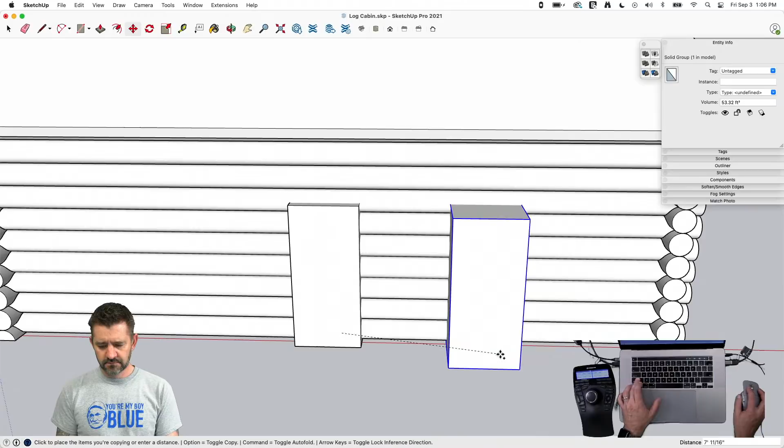All right, and then I'm going to try this. I'm going to take this, offset it. Now we'll move it over 6 feet. I'm going to come in here. It's 3 feet now, so I'll make it a foot taller or wider. I'm going to take this line and drop it down 4 foot and extend that through. Now I got a window cutter.

To make that symmetrical, since I came over 6 feet, I should be able to take this, move it this way 12 feet. 12 feet plus a foot. Wait, what did I do? I'm not real sure. I don't know. I was so enthralled just watching you stumble through it. I don't like where that is. Yeah, move it over 2 more feet. Nancy pointed out you wouldn't want to cut the lowest log. Oh, good point. Yeah, I'm kind of thinking I should probably have this extra log, the flat log here, huh?

So we must be doing really good because Lawrence has started dropping the pun jokes. First one I wasn't going to repeat because it had potty humor in it, and I know how sensitive our crowd is. But here's a good question for you, Aaron. Okay. What's it called when a log cabin eats another log cabin?

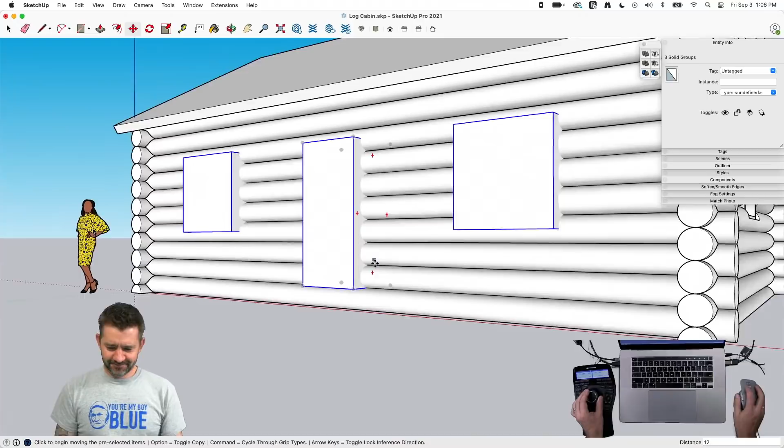Cabinabalism. Close. It's cabinalism. I respect that joke. Figured you'd appreciate that. Yep. The other one was about poop. I know you don't like poop, so.

This is the perfect time to be throwing out some jokes because I got a few repetitive tasks to do right now. So what I'm going to do is these two are going to get cut exactly the same. This one's going to get cut. These 3 will get cut exactly the same, and then this top one will get cut. As I do that, feel free to hit us with more jokes.

And I just got to throw it. I think ANSI actually designed and built some log cabins, if I recall the forum correctly. Is that true, ANSI? He didn't answer yet. Is that why he's here, is to tell me what I'm doing wrong? Maybe. It would not be the first time that somebody showed up for that reason. He could be here to try and learn a thing or two from you. I guess that's possible.

Lawrence said that log cabins are all right, but igloos are cooler. And I'm left wondering if he is basically just sitting there looking these up on his computer. Feels like something a Google search would reveal, or like if you just say, "Hey Siri, tell me a joke." That's the kind of joke she'd be dropping. Yeah, that does. Which is not to say it's not a good joke. No.

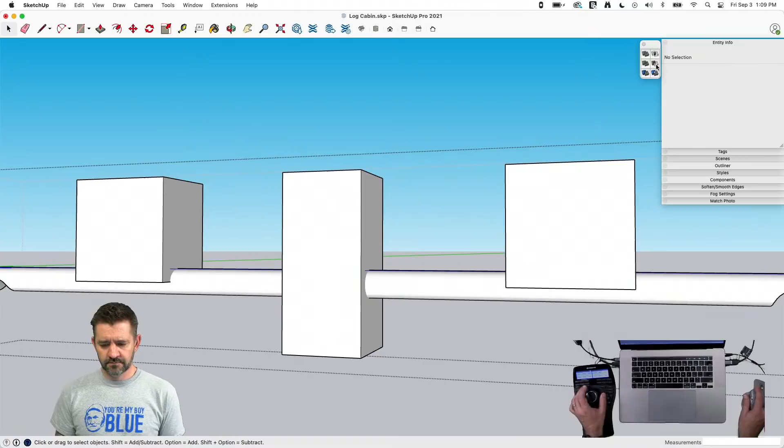All right, so I'm going to subtract. Whoops. Subtract that from this. Subtract that from this. And subtract that from this. So one of the things this is doing, by the way, is this big log is now one continuous component. Again, if I'm concerned about that and I want to see it as separate pieces, that would be one thing. If I'm not too concerned about that, then I can let it go. But that is a thing to note. Just want to point that out.

These ones will all be done at the same time, make all three unique. Then I can go into one, edit, paste in place to get my cutters in, and then I can just one by one cut that out of this, cut that out of this. Oop. And then cut that out of this. Last one. Same process, trim, trim, trim. Whoops, I forgot to hit make unique. Undo, undo, undo, undo.

So that's just ventilation. That's good. I've seen that in a lot of modern designs too. Those are my gable vents. Yeah. I don't want it to get too hot in the cabin.

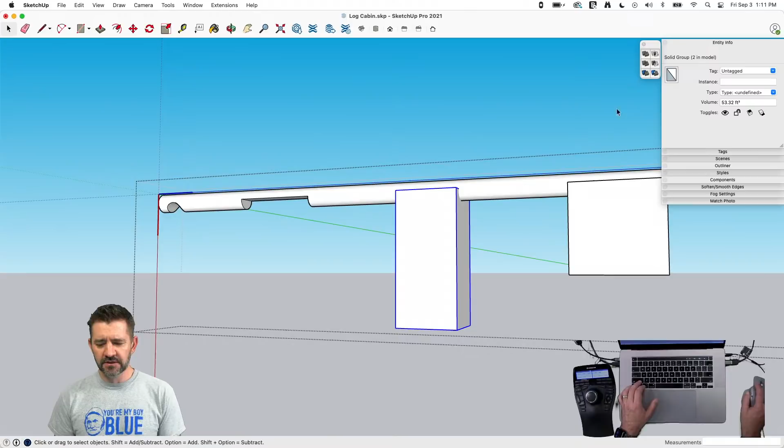I'll throw this out to the community. Have you guys played very much with Eneroth's solid tools? I think I played with it once or twice, and I haven't gotten a whole lot further than that. But I think one of the things you can do with that is it makes it very easy to edit multiple pieces at once, where the Boolean process with the standard solid tools is very one-to-one. I think with Eneroth, you can do multiple cutters or cut multiple pieces a lot easier. I was just wondering if you guys have used that at all. It's one of the many extensions that I would like to have time to play with. I just never really seem to find the time.

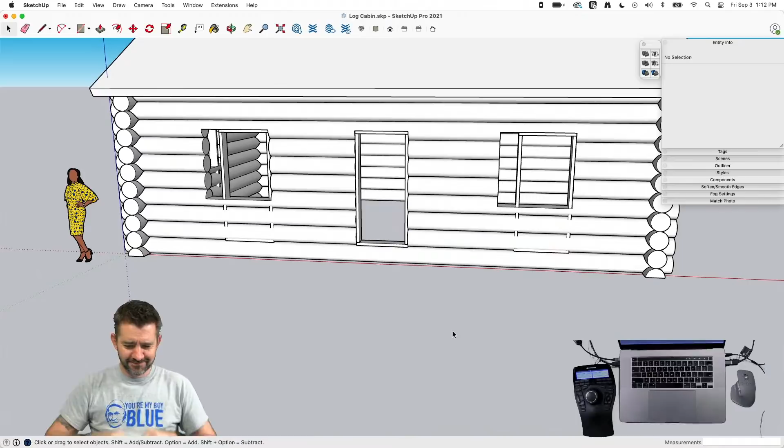I'm shortening my framing down here by 12 inches. That should take it in there. And then this guy here, show me the rest of my model. Drop this. And then I'll just use scale to scale these guys because they're rectangles. They'll scale well. Some shapes you don't want to use scale on because it makes a mess of them, but extruded rectangles are always good. Hey, guess what? That was a component. Neat. So I just screwed up every single window I have.

So here's what I'm going to do. I'm going to turn that oopsie into a teaching moment. I'm going to save. I love lemonade. I'm going to grab this window right here. So this is my window component, the correct shape and all, and I'm going to cut it. Command X. Now I'm going to hit Command Z until all my other windows go back to where they're supposed to be. And actually get rid of that. Now if I go Edit, Paste in Place, that shows up.

Now, something happens automatically, which is kind of cool. Here this was window. When I copied it back post screw up and before undo, it was also called window. But when I pasted it back into my model, because there was already a window, it automatically renamed it to window number 1. So kind of a cool SketchUp's being smart right there situation.

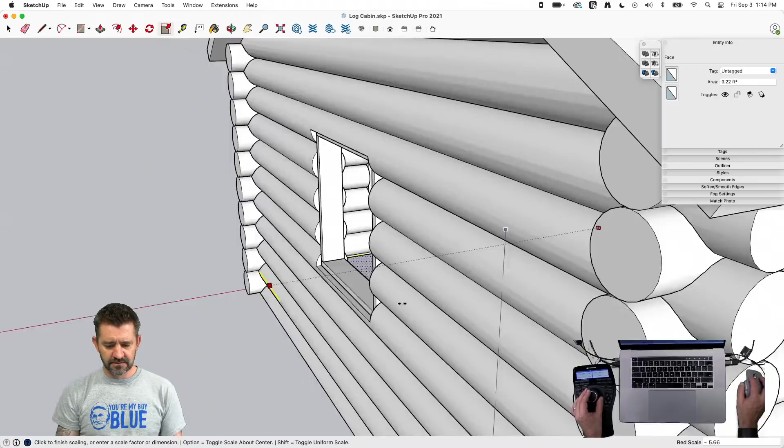All right, we're moving along. This is looking kind of cool. I like this. What do we do now? I guess we could throw a floor in here and take a nap. I'm assuming my floor would be about right about here. I'm going to just draw a working rectangle, and then I'll grab that and scale it, and bring it out to like...

I didn't notice it, but Keggy totally called you out on the Make Unique before that whole debacle. That's why, see, in order to let myself screw up enough for the perfect opportunities to cause some learning, I have to ignore advice. Guys are being smart, I gotta kind of ignore that sometimes. Keep your smart to yourself, jeez. That's right, listen to your smarties.

All right, so there's a floor in there. So something I was playing with in my head was, I was thinking how tough would it be to come in and make a component, make a thing to fill in the gaps, like get the concrete or whatever mud between the logs. There's a couple ways I could think of doing it, but I don't know how well any of them are going to work, so I'm going to save.

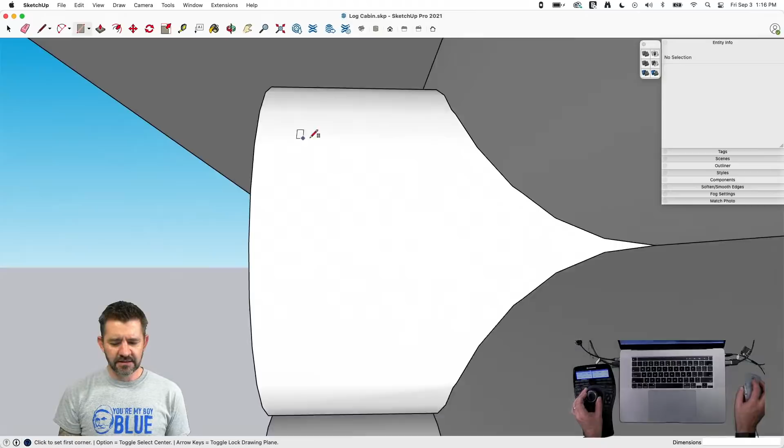That way I can always revert. So one thing I was thinking about doing was something like this: grabbing a rectangle, zooming in here, and finding a face - that's like 1, 2, 3 segments out from the log. Taking that might be too big, taking that straight over like this. That's too big, I don't like that. We need slightly less mud.

So what I could do, I'm just gonna draw this one by hand. Come down here, draw this one back to here. Yeah, that looks nice, that's like the right amount of stuff.

I can also, before I make this into a group, kind of cut like that and then get rid of this. Oh, that's another nice thing about a 3D mouse - I know if you've been here before, I've mentioned it - getting inside a house with a 3D mouse.

I'm trying to come up with a rhyme that means easy or good, but rhymes with mouse. I can't come up with anything. Orange? No wait, orange doesn't rhyme with it. And that's not the one either. It's good, is what we're basically saying.

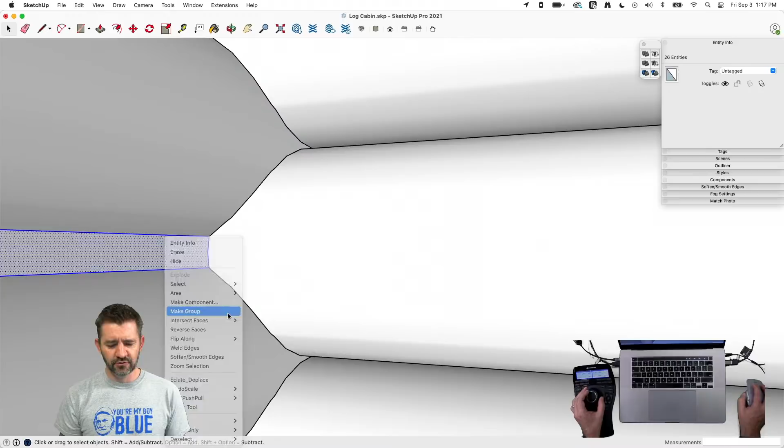It's good stuff. All right, so if I take that and push it through to the other side to where it snaps here, and then I'm gonna triple click and make that into a group. I'm not interested in making that a component right now because it's gonna get changed so many times. That does give me that mortar between the logs kind of look.

So now I'm gonna take it and option copy it down 8 times. Ooh, sometimes you get it right on the first try. Not often, but sometimes. Cool.

Maybe not the ideal order to do this in, but sometimes when you're designing, you're making stuff up as you go. That's right. All right, no harm, no foul. That's right.

I do feel like you need to trim those boards because getting in through that door is now completely not going to happen. You basically just created a pantry that's accessible from both sides. No, I created an opportunity to... okay, it's only 12 inches. Yeah, you can't, never mind. It's not a game to get in there.

That's just impossible. So let's figure out what the easiest way is going to be to cut these. They're groups, so anything I do, I'll have to do more than once. But I'm just trying to think - I could come in here, cut this like this, push that through.

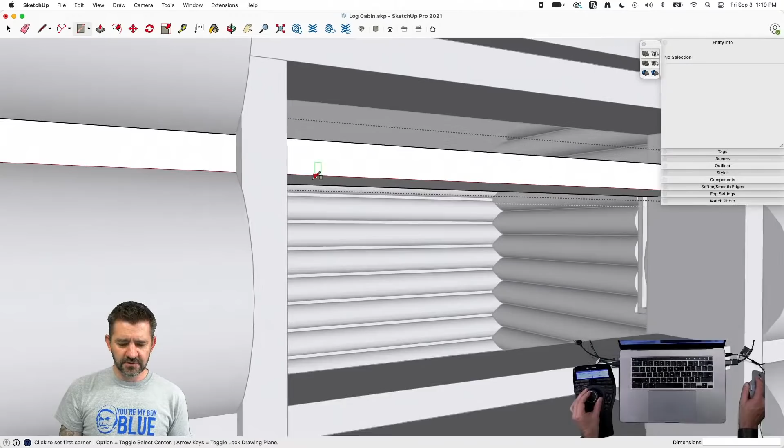Okay, this isn't too bad because I could come here and do this on this 3 times. Push that through like that. One more - rectangle from there to there. Push that through, just so it looks good on the inside. Looks perfect. And then I could erase these three.

And because they're separate pieces, but it's all in one group, I can just take it, option, drop it down 12 inches, make sure I'm going vertical, 12, 3 times, and there we go. Those ones are done. Then I'd have to do the same thing for these two. Open up one, put a rectangle across like that, push that through.

I guess that's probably just as easy to do that again as it is to copy it and place it. I don't know. That's one of those spots where, what do you like better? Copy and pasting or drawing rectangles and push pull? Your call. All right, that looks kind of cool.

I like the way that makes it a little more legitimate looking. And I only carried it out to these logs. I intentionally didn't carry it through because I don't think you'd actually worry about mudding the edges there. That's just a way to kill time in the middle of winter. Yeah.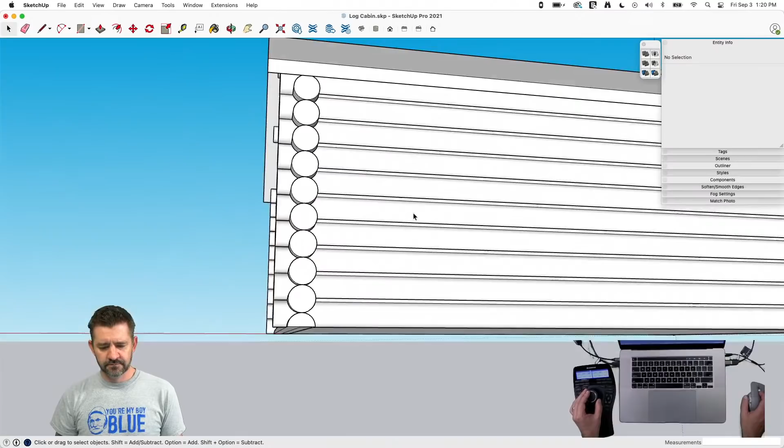Cool. All right, so coming up this side is going to be a little different because if I was to do that same exact process, I guess I could grab one of these off the back.

See, now in hindsight, because everything's so perfect there, this geometry could have been part of the log. The log could have gone up like this and then straight up at the very ends and emulated that same thing. But one of the things about doing it this way is there are different ways I could color it by having it be separate. That would be a little quicker and easier maybe. I don't know, I'm trying to justify my decision making.

I buy it. Yeah, completely makes sense to me. Okay. Grab that, shove it back 10 feet. Beauty. Take that, Option, copy it vertically, 12, and I don't know, 16 times?

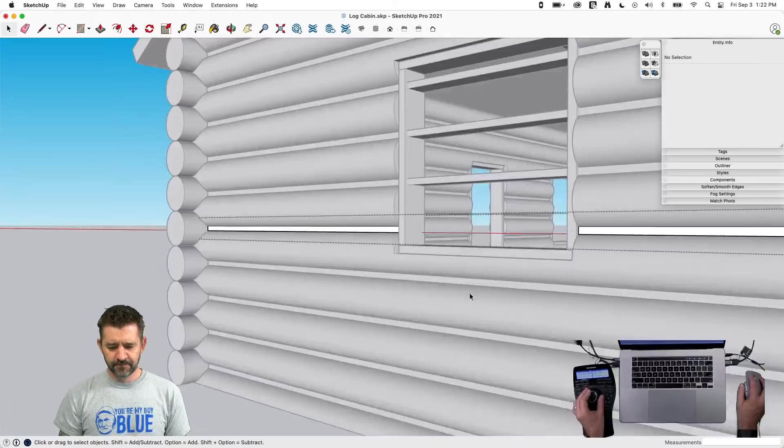All right, this one will be a little more work, because this is easy right here, so I can just do the same thing I did on those front windows, but I'll only have to do it once. Push that back, delete that. And then 1, 2, 3. Grab that. There we go. Option, copy that straight up.

12, 3x. That's solid. Now these guys right here, I'm trying to think of a quicker way to do this, and I don't know if there is one. Because I think what I'd want to do is come in here, draw a line like that, draw a line like this, hide the rest of the model, and then just push pull and double click there. So I could save time by double clicking.

One of the other things I was thinking is I could take this guy. So my process from there would be come into the next one, draw a line like this, draw a line like this, and then double click. It gets a little easier because they stick out of the roof, so that's not too bad. I could do that three more times.

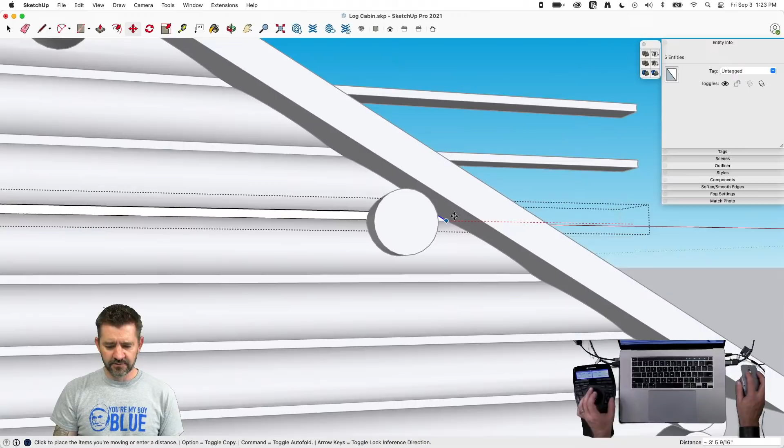The other thing I was thinking about would be to delete this, grab this, and then put it there, so snap it into place. But then I've got to come here, grab that, move it back along the red axis till it snaps in. Not terribly painful either way.

I am such a big fan of cutting things off as opposed to moving them. It's just decisive, you know, you're just chopping it off. And then with the double click to offset the same length. That's pretty easy.

I guess in theory, you could break this into multiple parts and have a dynamic component for this piece, but Keggie also suggested you could use the roof as a cutter. That's true, because that was a solid, and if they're both solids, that would absolutely work.

And then we need to just fill this whole section up here. So actually, I'm going to take this, slide it up, and then grab this, pull it all the way up like this. I'll do the final one the way Keggie's suggesting. We'll grab this guy, trim it out of this guy, and then when we come into this guy, just grab all this, delete it, and that's our geometry filling in.

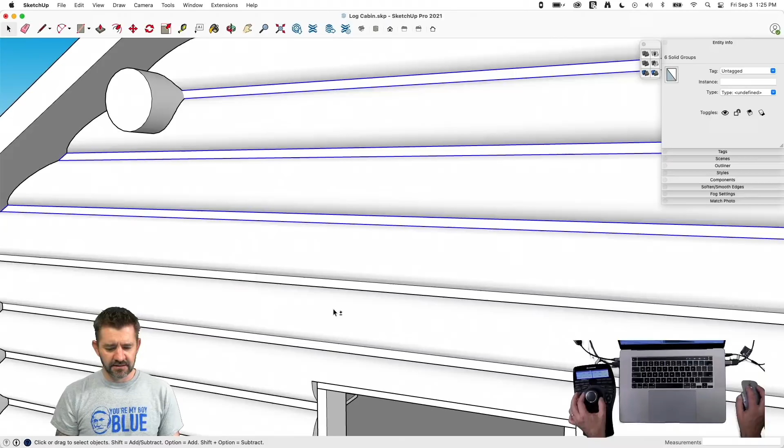Now, going back to the concept, I forgot who mentioned it. It was Lawrence. Somebody mentioned the idea of making the end wall just a big component, and that's starting to feel like it was the way to go, because they're the same on both sides. They're not even mirrored, they're full-on symmetrical pieces.

That would have made so much sense, because as I'm going through here adding more detail, I just keep grabbing it, copying it, 30 feet down. Hindsight, as they say. That's right.

That's pretty cool. I mean, for what, an hour and 15 minutes so far? It's pretty good, I feel pretty good about this. This is kind of a cool model. Yeah, Hornock's arrived.

Hornox? Yeah, should I delete it and do it again real quick? Yeah, probably could, 'cause you've already noted several ways that you could have done this more efficiently. That's true, but okay, that's the thing right there, right?

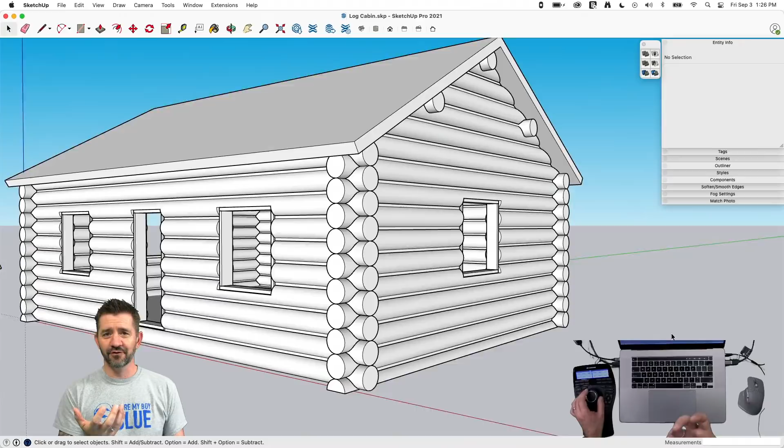I feel like learning experiences, anytime you do something, you have the opportunity to learn from it. Even if it's something you've done 100 times before, if you're paying attention, you could probably learn something. I feel lucky that when I model, I'm challenged with modeling different things all the time, that's kind of cool. But every time you model, you can get a little better at something. And that's where I get a little envious of people who model the same types of models over and over, because they get to learn a process. I feel like every time I come in here, I'm just hacking at something new and winging it through a whole other type of model. But yeah, being able to learn constantly is, in my opinion, a nice thing to have. So I'll defend that you do different stuff every time, in that you might figure something out while working on a car model, and then when you come in and work on a house, you're like, oh, I could use this technique from a completely different domain.

Too true, that does absolutely happen. Sorry, it was bugging me that floor was not... I didn't have edges there. There we go, I like edges at my intersections. Yeah, I mean, it's transferable information for sure, you can take data or experiences from one thing and put them on the next.

That is absolutely true. I guess I could throw some glass in my windows and a door in the door. I didn't do much as far as framing the roof or anything, it was just kind of a 6-inch slab. Lawrence is confused by the lack of stitching that has occurred as of yet.

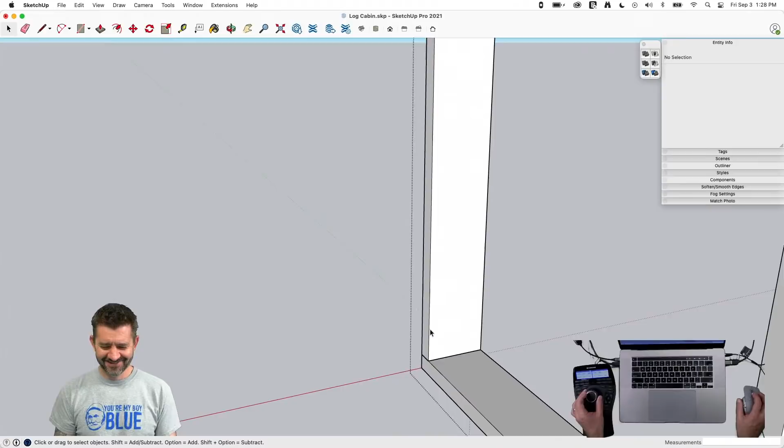Hey, sometimes you stitch, sometimes you don't. There you go. Sorry, I sound like I was going somewhere with that, but it was really nothing. It was absolutely nothing. Based on previous conversations with you, that actually didn't sound like it was going anywhere. Oh okay, thank you. Thanks for keeping me honest.

All right, I am going to just kind of going to make a little trim there. A rectangle here that I'll pull through. Make that a group, I'm going to go in there, grab all that, fill that with some glass color.

And I'm going to use a specific glass, because we're modeling this up in the woods somewhere, so I'm going to use the cloudy glass color, cloudy reflection glass color. There we go, yeah, that's the stuff. Blue skies, nothing but blue skies.

You got the blue shirt on, so you got the blue sky. That's right, glad he didn't wear a green shirt. Everything's looking blue. Ooh, that sucks.

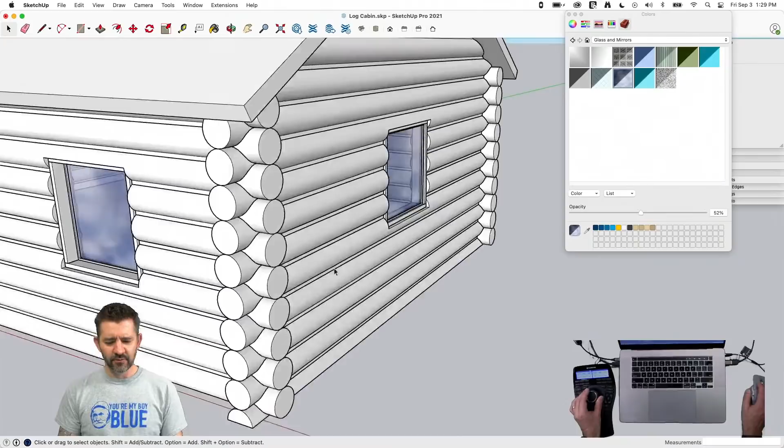All right, so I'm going to keep this, I'm going to pull it in a little bit, but keep it like, yeah, we'll pull it in 1 inch off of the outside. Give us a nice little windowsill on the inside. And again, because we got a component, I did that once here, and oh, these ones are reversed.

They're all reversed. Okay, so let's do this, let's come in here, let's grab everything. Go find the center of this top piece. That put everything back to the outside.

And now I'll grab this one component, go to move, and rotate it. The component, the actual container, not the geometry inside. There we go, that puts the window on the outside. Wow, what are the odds? Probably not that bad.

All right, a door. Similar thing, I'm going to go into the component. I'm actually going to take this geometry right here, make a copy of it. These are all groups and not components, I believe. So yep, I can take that and modify it to get me a nice door.

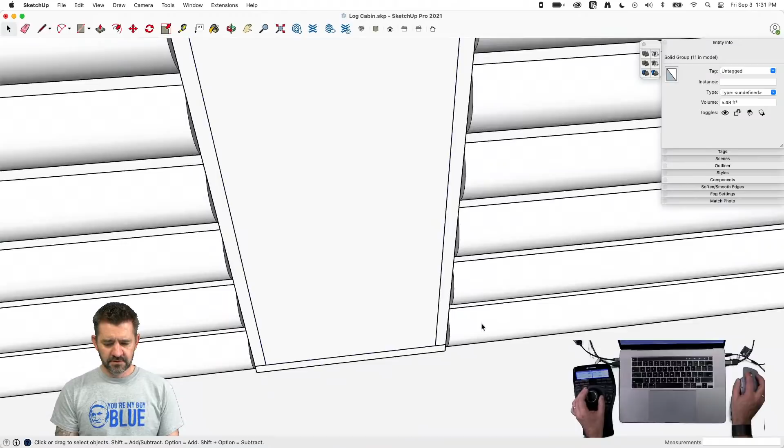And I'll use scale, right there. I'll make it a little thicker here. And I'm not going to model any hinges, we're just going to take it, and as most cabins should be, just slightly ajar. So, you know, teenagers who are lost in the woods go inside, because that's what you do when you find a cabin in the woods, and stuff happens from there.

I feel like you need the door to be swinging out, though.

Right. Was that the door should be swinging out? That's a fire hazard right there. Isn't that how front doors go? Don't they all go in? My front door goes in. Last time I watched a log cabin being built, the door swung out. I guess that's possible - in smaller structures they'll go outside because you don't always have room to pull them inside. So maybe so, that could be.

A log burner's needed, it's gonna be cold in there. I don't know, Simella's wearing a dress, she's not really dressed up too warm. I think we'll be safe, but it's still summer. That's actually kind of fun though - it would be cool to find some drawings of like an old potbelly stove or something, like something with some detail on it. That could be a fun model next time.

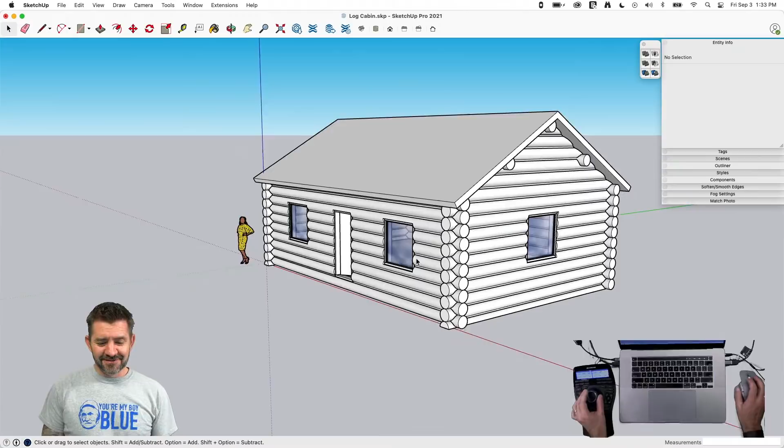Oh, Lawrence is pointing out that the glass is a little too flat and perfect considering I made it out of sand I found next to the creek.

Nancy said the windows are going to break in the first year, the wall will buckle at the window and the door holes, and there's nothing to hold the logs in place. But other than that, seems great. You didn't see - everything needs a little maintenance, you know. I put rebar all the way through here, you just missed that part. You didn't model the internal structure because you can't see that anyway. That's right.

No, this is a showpiece, this is for Cabin in the Woods Part 2. This is totally a Luke Whitelock, Chris Rosewarne type model - primarily fiberglass and foam.

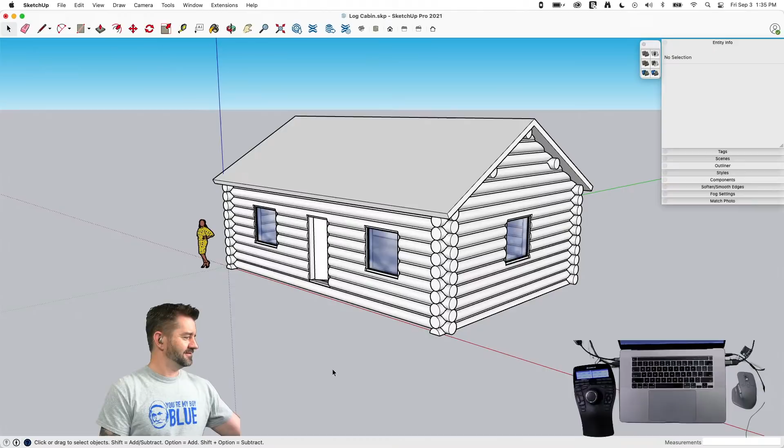Wait, was there a chicken at the end of that? How did that get in here? Get out of here. I do like that laugh. One of the first pieces we unpacked into the studio was just to the right of that second monitor - it is essential studio gear. The rubber chicken was one of the first pieces that came in here, before any cameras. I think that's standard, right? Isn't that how it's supposed to be, Matt? You've been in more studios than I have. The rubber chicken comes in and sets the stage, kind of blesses the room, there's like a ceremony and things of that nature. But yeah, it's all up or downhill from there.

Well, like I said, I don't really have any more ideas, and we've got a finished product here. I'm going to save this, I'm going to post this. Actually, I think I have to post last week's too, the ceiling fan - I don't think I ever posted that, so I'll get that up too. But I'm going to call this done right now because I feel good about where it's at, and I want to leave into the weekend feeling good about things.

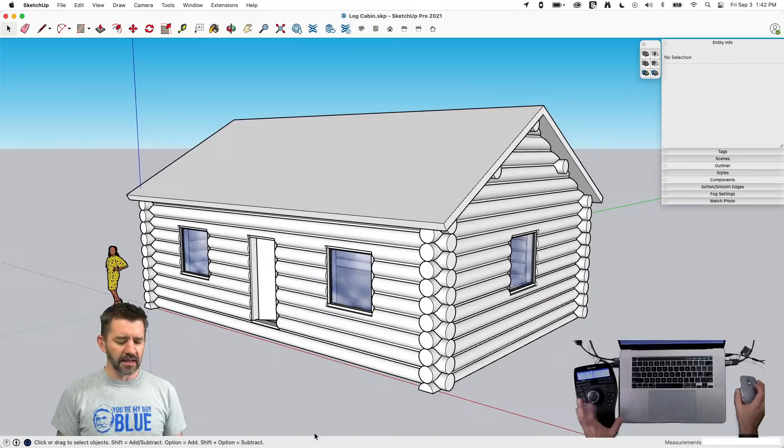The Space Mouse then has a whole bunch of undo, redo, hide, some shortcut keys for SubD and vertex tools, which I use a lot, as well as the modifier keys, which are all on here automatically. They're already set up. And then my arrow keys, all that is programmed onto the 3D mouse also. One of the downsides of a 3D mouse is once your left hand comes over here onto the 3D mouse, you don't have a hand on the keyboard anymore. So right hand's on the drawing mouse, left hand is on the 3D mouse, so you lose your shortcuts. You either have to jump back and forth or you use the shortcut keys on here.

So some of the other 3D mice that are just that little puck, just the little controller in the middle, are nice for travel, that sort of thing. But long term, you do suffer a little bit because you lose your shortcut keys and you end up jumping back and forth, which isn't bad. Like I said, for presentation, if you're solely going to go in and walk around this cabin, this is pretty hard to beat. This is a great way to explore a model, especially once you practice and you can walk in and out of doors, that kind of thing. And then it's not so big of a deal to lose those commands.

But if you're doing it to put yourself up as the next level of a designer, then it's nice to have a 3D mouse that has those shortcut keys on it. And there's 2 different versions that have large numbers of shortcut keys. There's the Pro and the Enterprise from 3Dconnexion. There's 2 buttons, I think, still on the little puck. Yeah, the puck has 1 or 2 buttons on the side that you can program.